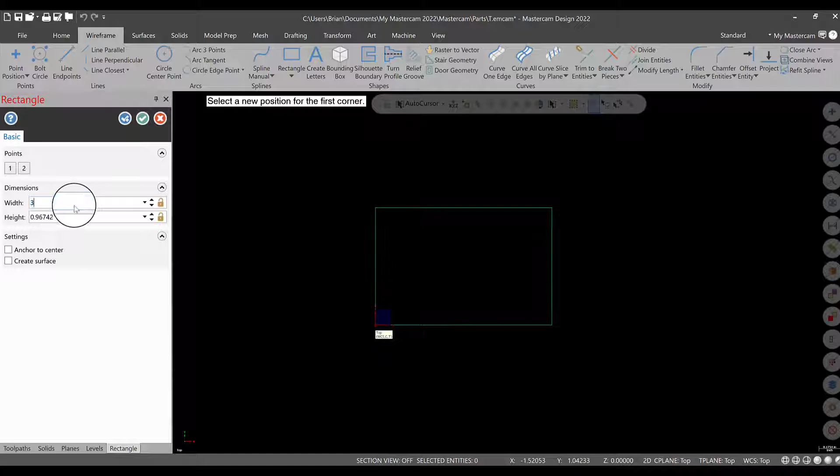I'm going to anchor a corner of the rectangle to the center of this gnomon and bring it out and click once, left click. I will then create the width at 3 inches and the height at 2 inches. Again, make sure this is set to 2D and hit green check. So now we have our rectangle. It's flat. If I go to front view, right click front, it's flat.

So let's check the size of this. One thing I do want to point out, here's some drafting. It is what it is. It just tells you the sizes. It's not like Smart Dimension or other softwares. It's 2 by 3. Okay, that's a good reference. Let's window these or click on them, hit delete with the keyboard. So now they're gone.

And let's go into levels now. What levels are is geometry organization. What's visible, what's not, how to select this, how to select that, and you'll see how this sort of flows. Right now we have 4 lines, 4 entities on level 1. I'm going to name this part wireframe. Okay? And now what I'm going to do is create a new level by hitting this plus sign. And I'm going to name this model.

Okay? Now, it is very important to know that if I right click and make sure this is active, it's the little green checkbox next to the number. When it's active, what you create is going to be on that level. Now, if you mess that up, there's ways to fix it, so don't panic. So now we have our rectangle.

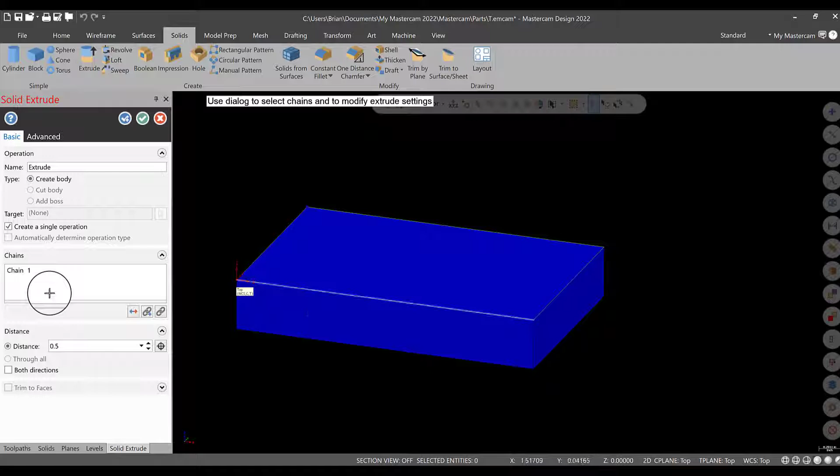We want to go to solids, go to extrude, select. This is the chaining dialog box, will be useful when we get to toolpaths, but just by default, it's going to chain it. Select the outside boundary, hit green check, and you'll see we're extruding. We're going to change the direction. We're going to create it as 1/2 inch. And that should be good there. I'm holding middle mouse button down and moving around. I will now hit green check.

And you'll see we have one piece of geometry, one entity on the model level. And we could turn it on or off, or turn our wireframe on or off. And that's the power of levels. It helps you stay real clean on what's going on. So now, what I want to do is change what level this solid is on.

Just to show you, if you click on a solid, right click, and go to Analyze Entity Properties, you can go down to this dialog box here, and let's say I want to create a new level, put it on level 3, and hit green check. Now that geometry is on level 3.

Let's say I didn't want to do that. Right click, Analyze Entity Properties, put it back on level 2, hit green check. Now we're back to the way we were. So you can fix it. Okay? So we'll pause there. I'll have you catch up, and we'll come back and start creating some holes.

Alright, so let's put some holes in this. First hole we're going to do is this 3/8-16 tapped hole here. So let's draw some wireframe geometry to locate this hole. So we could go back and make this level 1 active for part wireframe. That's fine. We could do a new level, whatever you want. Let's stick with this level here for now. Or we can change it.

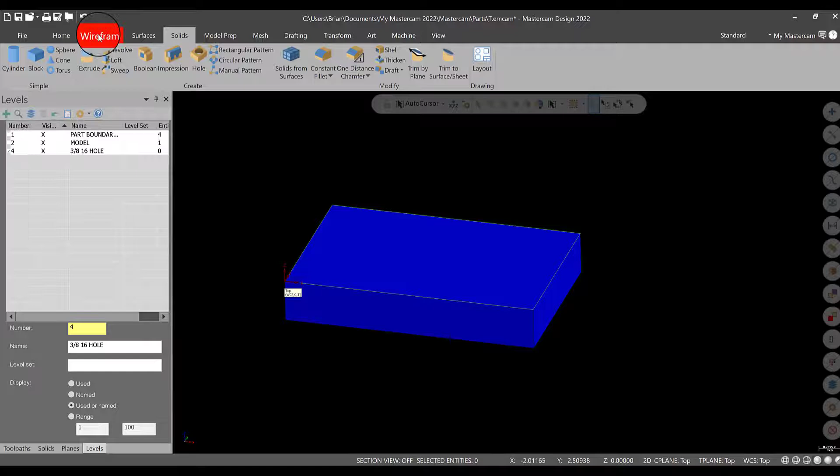So this is part wireframe. This could be part boundary. Okay. And then we could add a new level, and this could be 3/8-16 hole. So now this is active. Notice the check marks next to the number 4 level. And we need some wireframe geometry right now. Let's do it this way. Let's do a little bit of offsetting.

So we can offset these lines, okay, a distance of 0.938 and 0.531 to get an intersection. So what we need to do is go to the Offset tab in Wireframe, Offset Entity, type in 0.938, click this line, and then click the direction you want, then hit Apply, then 0.531, select this upper line and click down to pick a direction, then hit green check. So now those two lines are geometry, okay?

And if this line remains magenta colored, that means it was the last thing you changed. So right click and go to Clear Colors, which is the fourth icon on the right in the right click menu. So click that, everything turns to the wireframe color that was either defaulted or you selected. And now we have an intersection. Okay, so now we can go into solids, we can go to hole, and we can select the hole location.

So when we get into modeling, I usually skip a lot of the modeling in Mastercam because most of the time you're going to be importing models. So I do give a lot of the basics of models, how to do some of the stuff. But most of these skills later on you're going to work with are going to be editing. So I'm not worried about naming this or necessarily the target. It's going to default most of the time. What I am worried about now is the position of that hole.

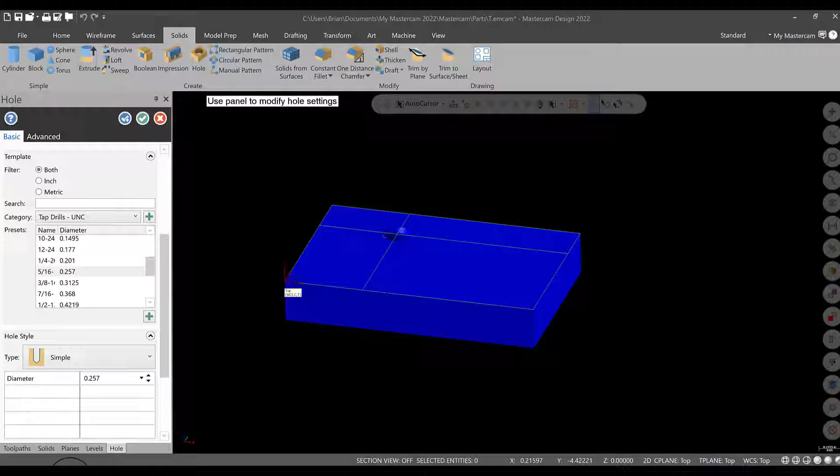And we have 5/16. So let's see what we have here. Or it's 3/8-16. Let me double check that. It is 3/8-16. My mistake. So let's get into here. It should be 3/8-16. That's correct. It does have the correct tap drill diameter for a class 2, which is 5/16. This is going to be through all, so the depth is sort of irrelevant.

Now there are options for a top chamfer. I'll look at the drawing, and there is no spec on that. So now again, it's going to default to 90. That is pretty typical to the machinist handbook. We're going to go with 82 degrees.

And we'll leave it at that at the 425. That's fine for this. I went with 82 only because we have a lot of 82 degree countersinks in the shop. We stock those. So that's the only reason I went with 82. That is not to the book. That is not standard. It will work in this example, but that's what we're going to do. So right now we'll hit green check, and we have our tap drill size hole.

So now what I want to do is get rid of the 3/8-16 hole wireframe spec. Now that's part of the model now. Okay, and we can even rename this 3/8-16 hole wireframe. And that's up to you how in detail you want to get. So we'll turn that off, and now we can start working again.

Let's do the next hole. So let's work with this one in the middle. So it's 1.5 and 1.125. 3/8 reamed hole, let's say. So let's do a new level, and this will be 0.375 center hole wireframe. All right, that is active. We can again go into wireframe and offset these lines to create an intersection in the center of this block, at least in the 3-inch direction. It's going to be 1.5 inches from this side and 1.125 inches from this side.

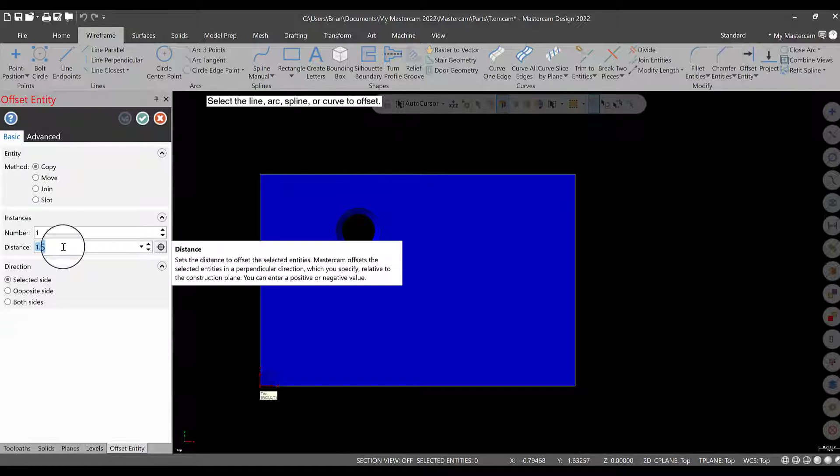So let's get back into Mastercam and we will offset those lines. So we'll go 1.1 inches from here to here. Or my mistake, let's get out of there. Actually, what we can do right now is before you hit apply, you can just change this to 1.5 and click out of the box and it'll automatically move. Then hit apply, so that one's set. Now we'll go 1.125. Click here and down and hit green check and clear colors. And now if I rotate this, we're ready to do our next hole.

Now, as I said before, we're not going to use the solids hole function for this. What we're going to do is we're going to go to wireframe, we're going to do circle, hover over the intersection here, create our circle at a diameter of 0.375, green check. So now we have our spec. Now, what we can do now is I want to go over some changes here. Let's say, for whatever reason, this is not the right diameter. Okay, go to the drawing and, oops, 3/8, we drew it wrong.

Let's say we click it, right click, and go to Analyze Entity Properties, and you can update the diameter here. Let's say we want to go to 0.5 inch. Okay, green check, it'll change. Right click, Analyze Entity Properties, 0.375, green check. You could also change the level in there like I showed you before. Alright, the other thing we can do is, I showed you how to use drafting earlier quickly. If we go to Home, or right click, Analyze Distance, and click from here to here, it gives us our distances quickly. It's more of a quick measuring tool in the software.

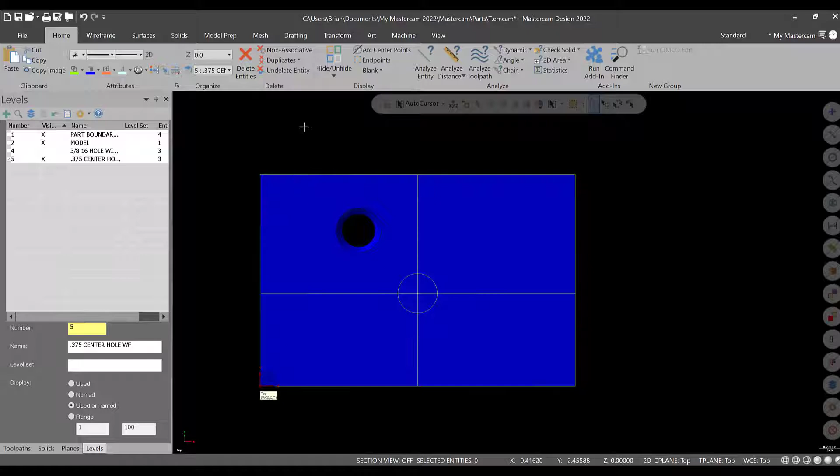So now what I want to do is I'm going to lose these lines because they're going to mess with my extruded cut. Then we'll get into solids, extrude, select the circle itself, so chain around, green check. Make sure you select cut body, very important. We're going to go through all. We will then hit green check. So now that 2D wireframe is there, our model has been updated. Alright, so I will pause here and we will continue with the rest of the holes on this workpiece.

Okay, so let's work on the lower left hole of this workpiece. Should be a countersunk hole. We are going to override this drawing. We're going to go to 82 degrees, primarily because I want to use one tool for when we get to machine this. So that would not be normal if you went and did this to print. We'll override that for this when we create this hole. So we're going to do this a little differently. We are not going to create geometry prior to locating the hole. So let's get back into Mastercam. And let's go to the hole function.

And this is a countersunk hole, 0.266 through hole. So let's get down here into a countersunk hole with a diameter of 0.266. Countersink diameter is 0.510. Countersink angle 82 degrees. 0.510, we're overriding the 100 degrees. 0.266 is the clearance hole. So all the specs are set there. This is through all. There is no top chamfer, so we'll omit that. Now the hole is set, but we need to get into the location.

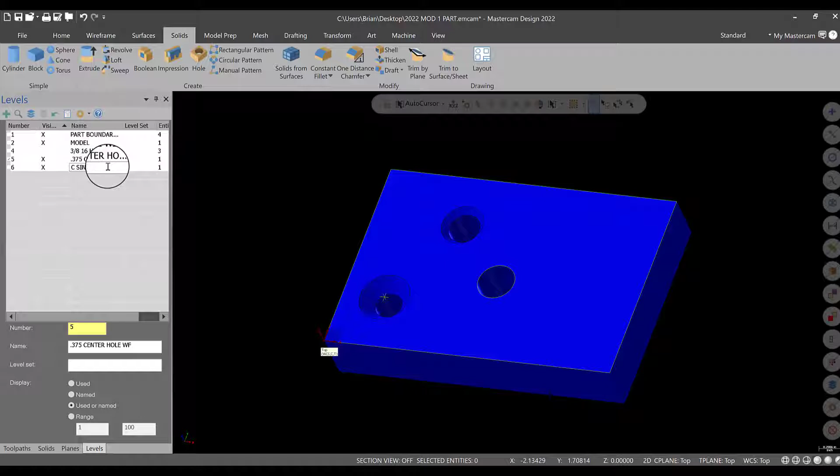If we right click on that, Analyze Entity Properties, okay, we have our location. It's on level 5. Maybe we don't want level 5, we'll go on level 6. And we have level 6, and this can be whatever you want to name it. Okay, and actually we'll just call it location wireframe. And again, these names are irrelevant. As long as they make sense to you, we're good to go. So there's that hole.

Okay. And now we can work on the next ones. So we'll take a look at our drawing here. And the drawing shows this counterbore hole. The counterbore hole, we are just going to extrude. We're not going to use the hole function in solids for this. And the reason for that is because I want to show you how to extrude to a depth. If we wanted to use the actual hole function, we would just do it the same way as a countersunk hole, except we would select a counterbore hole and give it those specifications.

So what I want to do is I'm just going to use the offset trim method, and we'll add a new level for this and just call it C-bore hole wireframe. Make sure it's active. Alright. We'll get into wireframe and we'll go to offset. And let's take a look at the drawing. It looks like we're ½ inch in the X minus and 781 in Y minus. So we'll take care of the ½ inch now. 0.5 this way. Apply. And 781 in the Y. So 0.781 from here. Alright, green check. Right click, clear colors. So now it's located.

Alright. Now we're ready to add some circles. We look at the specs of this hole. The through hole is 397, the counterbore is 719. So let's take care of the through hole first. So the through hole, 397. Select circle, select the intersection, create the arc, whatever size you want, type in a diameter of 0.397. Before you hit apply, just check it. You can change it later, but that's what we want to do. Then we'll hit green check. Now I'm going to lose my offset lines. It's called the offset trim method because you offset what you need and then trim what you don't need.

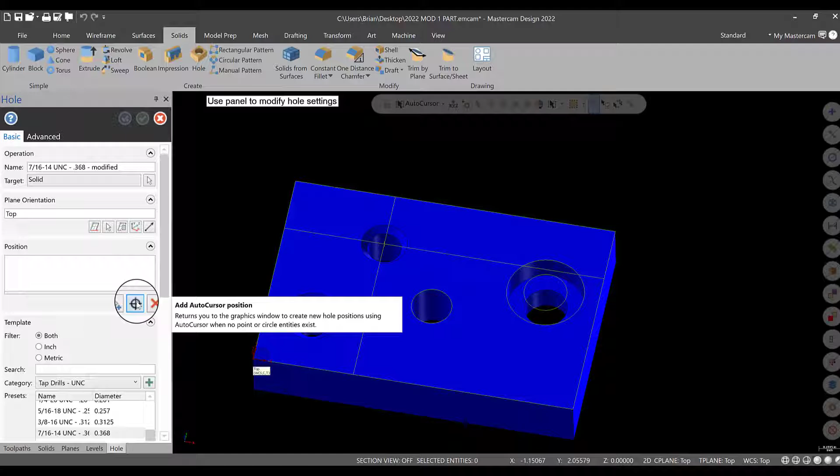We will then add our auto cursor position. Okay. And then we could work through this. So let's take care of this now. Let's just position this hole somewhere in space here. Right there. Okay. Then hit enter. And there's our hole, and we'll hit green check. We have no idea where it is.

Okay. So now let's edit this. Let's click this feature, right click, analyze entity properties, and let's locate it. So in the X, this feature is 3 inches minus 5/8. So 3.0 minus 0.625 equals 2 3/8. So go back here, and we will type in 2.375.

In the Y, 3/8. So we'll take care of that now. 0.375. We'll put this on level 7. Okay, hit green check. Now let's take a look at the solids menu, because this didn't update. Okay, just move the center point. Let's get into the solids menu, and you'll see that there's a big X here. And what's X'd out is our 7/16-14 UNC hole.

I'm not going to go into this manager much, but just for fixing things like this, if you click on this and go up and hit regen, it'll move to where it needs to be, because it regenerates the algorithm to position that hole. Okay, looks good there. All right, now we're all set with the solids. We'll go to toolpaths, leave it there. Everything looks good. We'll go back to levels, and we'll just turn everything off except for our model.

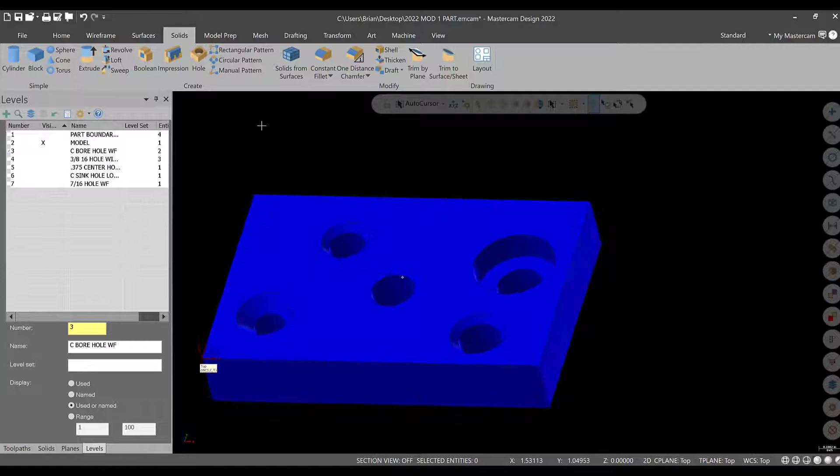I'll label this 7/16 hole wireframe, and there we are. So there's our model. Okay, now we'll pause right here and let you catch up, and then we'll come back and create our stock reference for this, and we can start machining it.

Okay, so let's start working with creating a new model for stock. Let's get in levels, and I'm going to add a new level, and this will be stock wireframe. Okay, and I'm just going to do a quick rectangle. I'm going to turn all this stuff off, except I can leave the model on. All right, and I'm going to do a new rectangle, and I'm just going to click that corner to that corner of the block. Okay, 3x2 instead of typing it in.

We'll hit green check. Okay, so now I'm going to turn the model off, and I'm going to extend these two sides over for 1/8 of an inch oversized material, so 1/16 a side. We're not going to worry about the Y. We're going to assume that's been machined or as is. We're just going to worry about having extra stock length here. So let's get into the offset area. We'll go 1/16 of an inch.

Click here, green check, right click, clear colors, and then let's connect these longer lines by going to modify length. Let's select a distance of, let's just say 1/4 of an inch, and the reason for that is I want to go back, hit green check, and use divide, which is sort of like trim, and trim the tails off and trim these inner lines so that you get one solid rectangle, right? And the corners do touch.

So we'll hit green check, and let's do a new level, and this will be stock model. All right, this is active. Go to solids, extrude, chain the outer boundary, green check, distance 1/2 inch. We're going to create body. We're going to make sure we go down. It goes that way. We're good there. We'll hit green check. And the only thing we need to do is right click on our stock model and make it a different color. Let's say red. Okay, so there's our model.

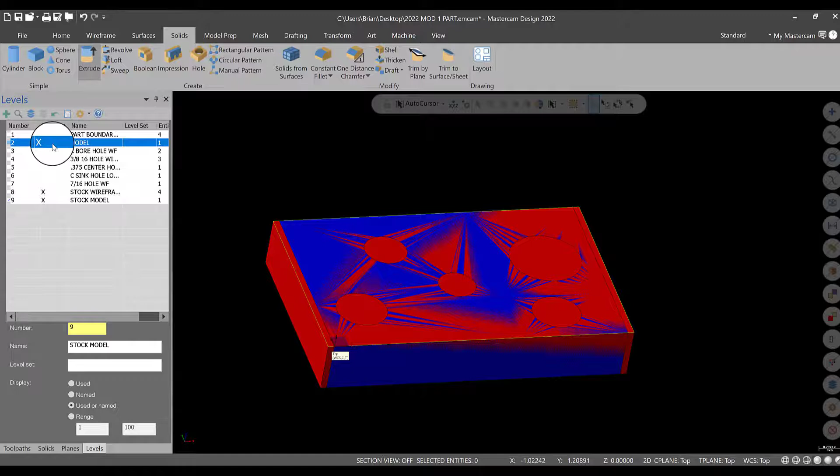There's our stock. And now we're ready to import our vise and modified soft jaws. So we'll come back, we'll modify the soft jaws next, we'll import them in, update the soft jaws, and then we'll merge all the files together, and then we can start getting into some toolpaths. So we'll pause here. This is the end of the part geometry creation, and then we can get into getting this thing set up to machine.

Okay, so this is the lecture folder in Module 1 on Blackboard, and what you see here is going to be the example 1 drawing, what we're working with. You're going to see the standard Kurt jaw.

You want to download this now. You also want to download the Kurt DX6 with no jaws. Download both of those now. Okay, this Haas Post content folder we'll work with in a minute. Then below here you'll see this video and this cutter compensation type video. Now, these two we're going to import or merge into Mastercam and work with. The Haas Post content folder we'll use when we get ready to machine. So first thing we need to do is modify these vise jaws.

Okay, so let's get back into Mastercam. I already have them downloaded, and there's a couple of ways to do this. You can modify the levels later. I'm going to turn the stock model, all the levels off, all the part levels off. Then I'm going to add a new level and call this jaws. Then I'm going to do another level and call it vise. Alright, so I'm going to make sure level 10 is active.

I'm going to go to File, Merge. I'm then going to select the standard Kurt jaw, hit open. Alright, and you'll see that you have options here. We can move it. Levels is what I want to focus on. We want to make sure that we go to the active level. Merges incoming part geometry to the current part's active level. Should be level 10. Click here, make sure active level's on.

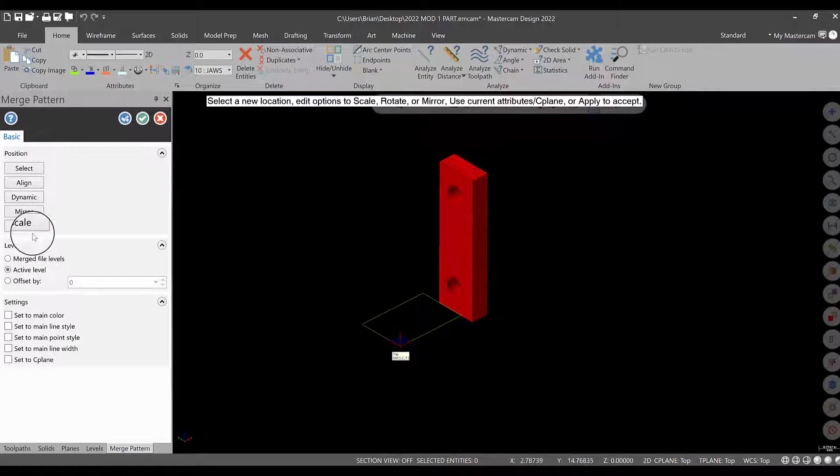Now, we can move this around. So if we go to dynamic, put the gnomon right there. Now we can spin it. But you'll notice we don't have a Z-axis. We need to come down here and select 3D. Now we can rotate this vise jaw 90 degrees this way. Hit enter twice. Pick the green, which is about the Y, and go negative 90 degrees. And that is good for now. So we'll hit green check. That looks good. Alright, and we'll start working with this.

Now, I am going to bring in the vise while we're at it. I'll put the jaws in the vise, and we will process right through this, machine the jaws and go that route. So now I want to go again to File Merge, but first make sure Vise is selected as the active level. File, Merge, select the Kurt vise, hit Open. You'll see it imports in. Now, we're going to go to active level. And then we're going to hit green check, because I want to turn the jaws off.

Also, our level came in with it. It has no entities on it. See right here is a 0. So what I do is right click, Clear empty levels, All. Let's make sure that's gone. So now we have the vise and the jaw and the part. But right now the vise is sort of in the way.

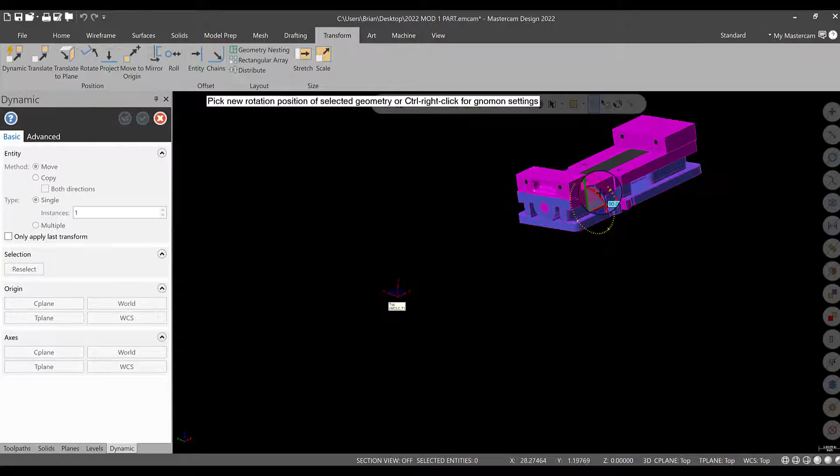So what I want to do is go to Transform Dynamic. Select everything. Hit Enter. I'm going to end up selecting just the center here. I'm going to shift this thing over. Then I'm going to rotate it how I want it. So it's going to be 90. And then I'm going to kick it this way. It's going to be negative 90. And that'll work. So I'm going to hit green check. Now I want to right click, clear colors.

And that's pretty good. What I want to do now is there is the actual model of the guard for the vise. I'm going to get rid of that. Also I don't need to worry about the threaded rod or the actual carriage portion, the part that moves the movable jaw on this vise. We'll try to keep it as simple as possible. So now I want to position my soft jaws. I'm going to turn the jaws level back on.

I'm going to move it. So I'm going to go to Dynamic. I'm going to select the soft jaw and end selection. I'm going to put the gnomon on the back side of this hole, and then click this little center sphere to give me full access and movement of the jaw. Then bring it over to the vise and select the actual threaded hole in the vise and click it so it merges. Everything looks good. There's not a gap underneath here, so these jaws are not symmetrical. This hole is offset. That looks good. So let's hit green check.

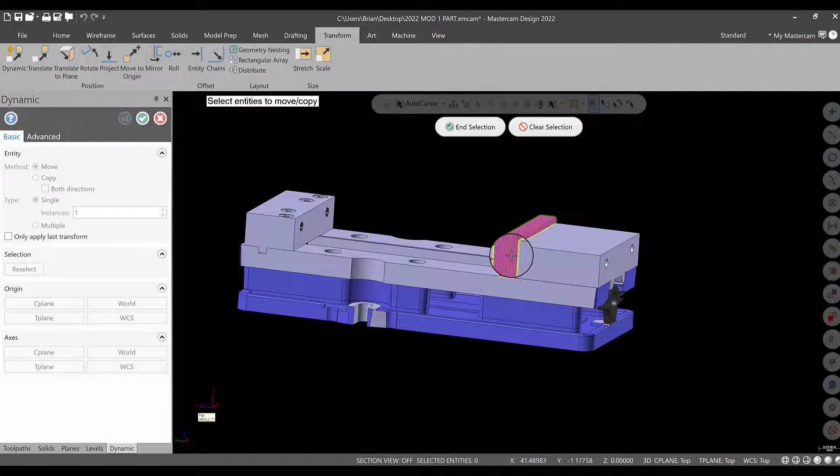So now let's copy this jaw. Let's go to Dynamic again. Let's select the jaw. Let's hit End Selection. Let's just put the gnomon at some center portion here. Go to Copy. And I'm going to drag it over.

Alright. And I'm going to spin it now, so about the Z or the blue. So it's going to be 180. Then I'm going to hit Apply. Now, when you hit apply, you're back into the window. So I'm just going to reselect the jaw and hit end selection.

Put the gnomon on one of the clearance holes for the bolts. Select the center sphere. Don't worry about it, it's still on copy. We'll fix that in a minute. We'll snap it to that circle. Select move. Okay, that looks pretty good. Alright, I'm going to hit apply.

Now what I want to do is bring these jaws together. So I'm going to select the jaw itself and the movable vise, the back part of the vise. Okay. So now I want to hit end selection. I'm just going to select the midpoint here. Then I'm going to select the y-axis only and bring it together. Okay. Then I'm going to hit green check.

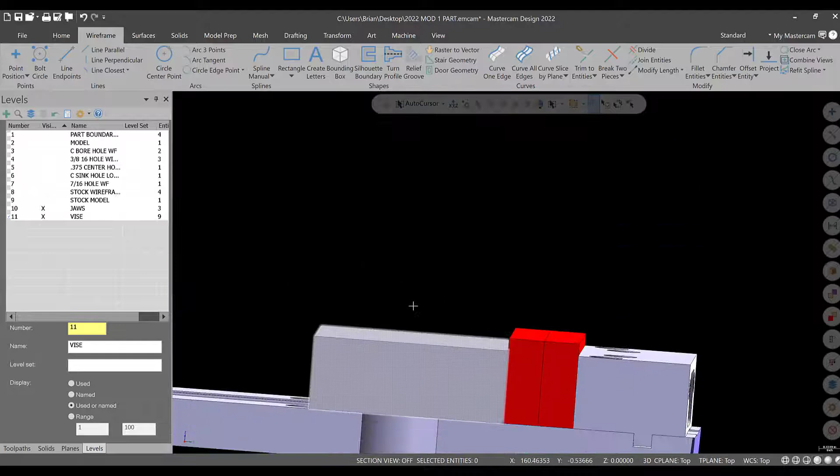Now I want to right-click clear colors, and I want to make sure everything looks good. I want to make sure that they're all in line. Everything looks good. I don't see any issues. So you know, I'm using a space mouse, so my movements are going to be a little different than what you can achieve. Okay, so it looks good. All right, we're in good shape.

Okay, so now what we need to do is we need to machine these for the part, and the part is back over here. Okay, so we need to draw some geometry. So I'm going to leave the vise on, but make sure the active level are the jaws. I'm going to draw a line, and I'm going to snap it to the center of these. So if you hover over the midpoint, it'll kind of snap. Draw a line straight over. Then hit green check. I'm going to go to top view now.

So then I want to have the step in this jaw be a little bit under the width of the part. So I'm going to offset this, and let's say I want the total width to be, if it's 3 inches, it'll be 3 and 7/16. So instead of actually getting a calculator out, you can go 3.4375 divided by 2, enter, and it gives you the number. So you can do the math in some of these columns.

Click over, green check, right click, clear colors, and then right click again and go to analyze distance and select these lines to make sure you got 3.4375. Now I did my math wrong. It should be 2.4375. So let's just do that again. Alright, offset. I'm going to go 2.4375 divided by 2 and click both directions. Green check, clear colors, right click, analyze distance, here to here. Okay, 2.4375. Good. All right, we'll hit green check.

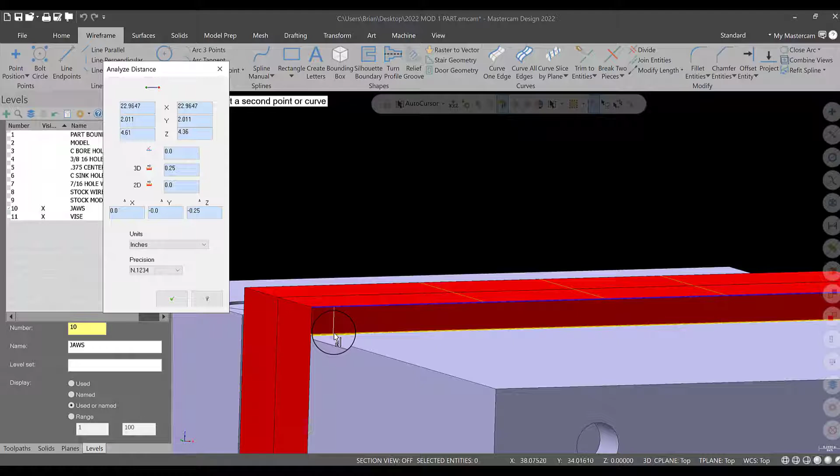So now we need to machine this material away. Probably we don't want to go all the way down to the jaws. What we can do is we can look at this. If we right click and go to analyze distance, here to there, it's 1/4 of an inch. So what we need to do is we'll probably go down 200 thousandths.

All right. So let's get ready to actually do some tool paths. The first thing we need is a 0. We need a point on this vise jaw that we're going to edge find and set our work offset to. And we're just going to go to this top left corner for this part. So we're going to start messing with the planes manager now. The planes manager are the 0s, not only for Mastercam geometry creation and all that. It is where your work offset is, linking the Mastercam program to your machine tool.

So we want to do a new plane. So we're going to go with the pull down. We're going to go dynamic. Okay. We have a gnomon attached. We're going to click right there on this corner.

Okay, pretty simple. And then down here, make sure set as work coordinate system, T-plane and C-plane are on. The work coordinate system or world coordinate system is the overall 0 on your workpiece. But for now, it is very important that your WCS matches your T-plane and your C-plane. Very important, because the only time these really change, arguably with C-plane, is when you want to do construction. I find that sort of obsolete, but you can work with it.

The thing here is, if you want rotary axis moves or Mastercam to kick out A or B or C axis moves, it is the difference between a WCS and a T-plane. So it's very important for our 3-axis work that these are all the same. Okay, let's hit green check. So there's our new plane. Now we could rename this. It's probably not a bad idea, and we'll just call it fixture.

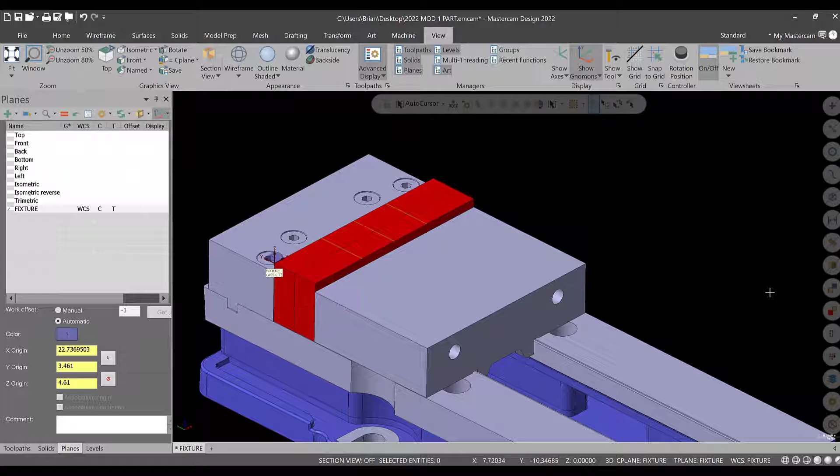Okay, so what we're going to do now, right prior to machining, I was debating whether or not I wanted to step these jaws or not. You could use parallels in here, but we're going to step them. So what I want to do right now is move this vise jaw back 2 inches. The only reason I'm picking 2 inches is because we use a 1-2-3 block, flat, and then clamp on it. It's very important that you clamp on the vise or have the vise being squeezed when you machine it. Otherwise, this jaw is just loose in space and bad things can happen.

So let's get into dynamic. Let's select both portions of the jaw, hit end selection. We're going to select the middle. We'll select the y-axis. Then we'll type in minus 2.0. Enter, enter. So now they're spaced 2 inches apart. Let's check that. Right click, analyze distance. Bottom of this jaw to here, 2 inches. We're good. Now, our lines don't work out anymore.

That's okay, because we can go to wireframe, modify length, type in a distance of 2.0, and click these lines. So now they're extended. Now, we are going to cut a little bit of air if we do it this way, if we have the cutter come in and machine that, but that's not the end of the world. We can be more efficient and just do each jaw separately, but let's just leave it like that for now. So we'll hit green check.

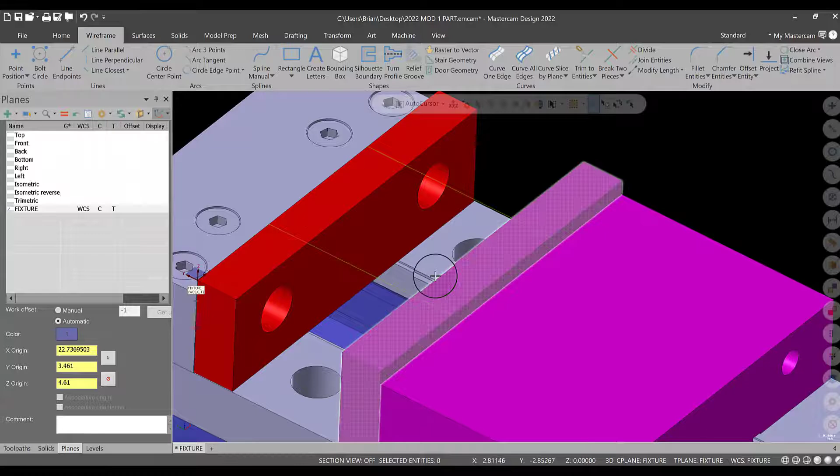Now, let's offset a line in on each one of these jaws. What that'll do is give us a nice guide curve for our chain. So let's hit offset. Let's hit a distance of 0.2, which is fine. You can go 1/8 of an inch. 0.2 is fine, that's what was on here. We'll select this line, go over. This line, go over. Then hit green check. So now we have, right click, clear colors, our lines.

Now let's use the divide tool and clean this up. I'm going to lose these outer lines because that material is going to be gone. We don't need that. The other thing we can do is lose the centers here. Like I said before, that's debatable. Right then we're going to leave them, but let's lose them right now. So now that's essentially what we're going to be working with.

So now we're ready to actually extrude this down and get this part into a 3D state. So now get out of here, and we need to get some geometry on these jaws. We can't really reference these edges right now. So in wireframe, we'll go to Curve One Edge, and then select these outer lines.

Okay, and it just creates wireframe geometry on that intersection. So hit green check. Then we've got to go to divide again and get rid of the geometry in between this area. That better references what we want to extrude down in this cut. So now we're ready to extrude this.

So let's go to solids. Let's do this one at a time. Hit extrude. Select this chain. There's the chain. Hit green check. And then we want to have a distance of 0.2. I'm going to leave a little bit away from the jaw so we won't hit that. That'll work out fine. It could be less. It's up to you, but I think that'll work fine. That's what we're looking for. Okay. So we'll hit green check.

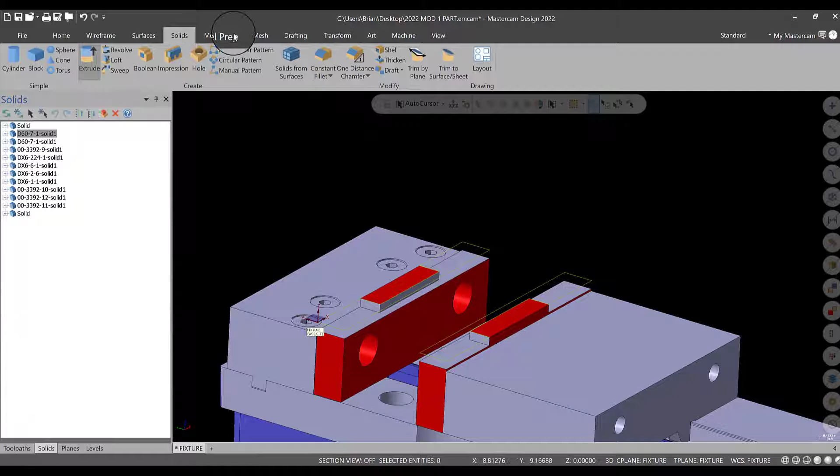So in Solid Manager, I want to really delete. You'll see these are our solid jaws. This is the history. You can go back and edit these if you want. But to be honest, I don't find that totally helpful sometimes. I think it's sometimes better to go into model prep and modify things if possible.

So for right now, just to keep this simple, what I want to do is select all solids, right click and go to remove solid history. Now these solids are just solid bodies. Okay, we removed the association between the 2D and the 3D. So now if we click this line and hit delete, nothing happens.

If you try to delete a line and you do not remove the solid history, you'll get an associated geometry error. So it'll ask you, do you want to delete this? And it gets kind of weird. So you're better off by far to just remove solid history, especially on simple parts like this, because you can always go back in and modify later. It's not the end of the world.

So what I want to do now is get into levels. I'm going to turn the vise off. That helps so I can see better. Then I'm going to get into here, and I'm just going to delete this 2D geometry. We don't need it right now. We'll work with it as is. Okay, so I'm just hitting delete on the keyboard. So there we are. Turn the vise back on, and we are good to go.

Now, one issue we have is we do need something to reference our stock for these vise jaws. Okay, so this is the results of what we want. You don't really need it. It's up to you. It's how realistic you want to get. We could actually import the jaws again and put them in place and work with it that way.

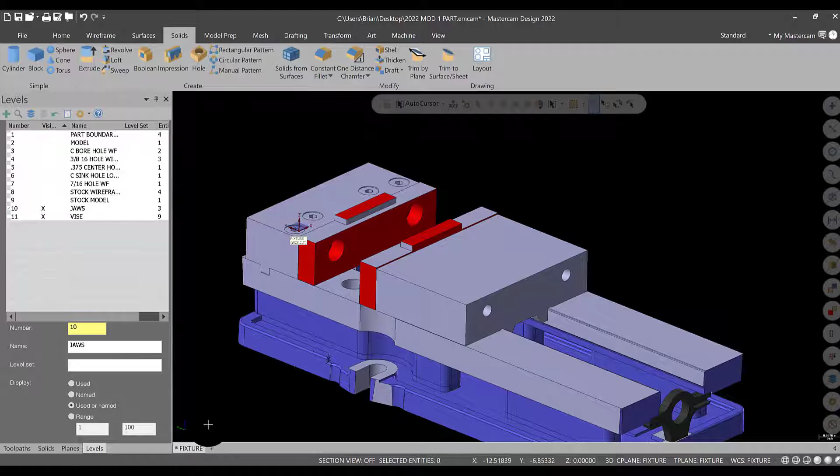We have our fixture view sheet all set. So that's important. Double click on it, you see it goes back to where we're at. This is what we're going to be looking at. We're going to assume that there is a 1-2-3 block in here, remember that. And then we can actually machine these jaws.

So first thing we need to do is get into the lecture, and then make sure you download the Haas post content folder. So I'm going to click that now. Mine is going to download right into my downloads. And then I'm going to get back into Mastercam, and I already have that file open. But what you want to do is take that folder.

All right. I'm going to minimize this screen, and I'm going to minimize Blackboard. And I'm going to right-click and go into the File Explorer. Go to Downloads. You're going to want to take this generic Haas 3-axis content folder that you just downloaded, click it, hold it, and drag it into the window here. Okay? I already have it in there, so I'm just going to X out of here.

And X out of all of this. This will not happen to you. Okay? So we're good to go. That's what you need to do.

Now what happens is when you go to Machine, Mill, you're not going to have this right away. You have to go to Manage List. Okay? In here, you're going to select the generic Haas 3-axis mill, hit Add, so it goes into the machine definition menu items, hit green check, and then when you go into the pull down, it'll be available here. So make sure you do that. Click right here, and now we have a machine group.

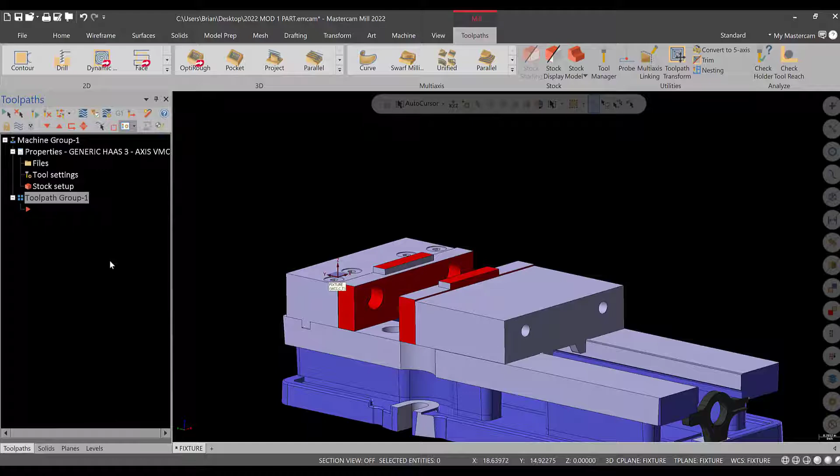Okay? The machine group is really not changed a lot if you're going from lathe to mill to wire to whatever. So for right now, a machine group has the files, tool settings, and stock setup right here. A toolpath group, you can have multiple toolpath groups in a program. You can have toolpath groups on top of toolpath groups on top of toolpath groups. They're just there for organization. Okay, and I'll show you how to organize that. All right.

There are a couple different ways to define stock in Mastercam. We're going to use the stock setup for this first one. So what I'm going to do is I'm going to click anywhere in here. I'm just going to click Files, and you'll see that when you click that, you got Files, Tool Settings, Stock Setup. You have the same thing here. All right. Not much to do in Files. We'll leave that for now.

We will go to Tool Settings, and you could define a program number here. Feed calculation, I'm going to go from material, and these are just going to be aluminum. That's fine. We'll get into speeds and feeds when it's appropriate, and work with it from there. I do have libraries we could work with, but we'll end up just typing them in for this one just to keep it as simple as possible in that respect.

We are going to want to assign tool numbers sequentially. That means it's 1, 2, 3, 4, 5. That's how we're going to operate. We're going to warn of duplicate tool numbers, all right, and that should be enough. All right. One thing I want to do here: let's just double check aluminum, what the settings are.

So if we click aluminum, the base cutting speed is 1,000, and the basic feed per tooth is 7. That's okay. We are going to have to be careful when it comes to high-speed steel. We might have to reduce the surface footage, probably around 200 if it's aluminum. Some of these might have to be reduced, but these are pretty generic. Okay, so that's okay. Even the 7,000. We can tweak this, okay? It depends on the rigidity of your setup, but this is a good overall base surface footage and base feed per tooth. Okay, so we'll hit green check, and that's fine.

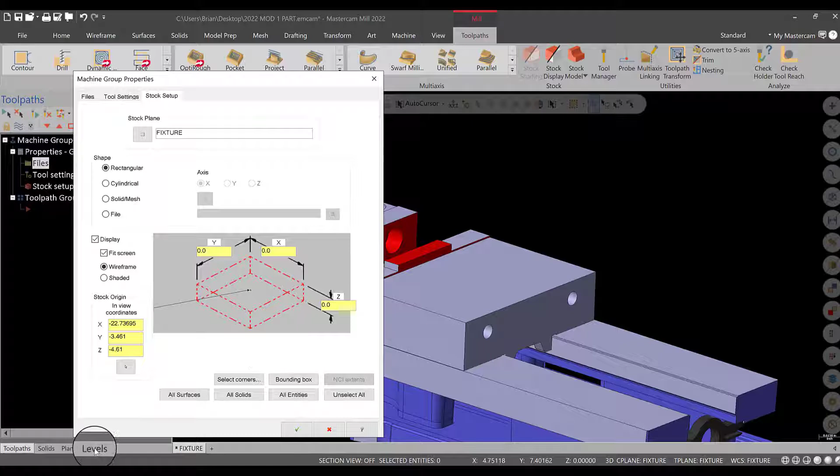So let's get into levels, and it won't let you because this is open. So let's just hit green check for now. Get into levels and turn the vise off. So all we have are these jaws. It's the only thing on. Back into toolpath, stock setup.

Now what I want to do is I'm going to select all solids. So here is the outside spec on our stock. Let's hit green check, and you should see a box come up that's dotted. That represents our stock. Like I said before, it's not 100% accurate to the true stock. We do have a lot of hollow space in here.

But the toolpaths we're going to be using are very simple. We're just going to use contour for this. So it's going to cut a lot of air anyway without a lot of extra chaining. And I don't want to get into the more advanced toolpaths yet. So we're going to just use this for stock, and it gets into what stock setup is before we get into the different types of ways to define stock. So that's a good base example. So that's what we're looking at.

Get into planes, levels, and turn our vise back on. So we're ready to roll here. All right, go back to toolpaths. Now I'm going to minimize the properties, and we're going to work with toolpath groups. So this first toolpath group, if I click on here, left click, and hover over it, it'll turn into a text box. So I'm just going to call this fixture. All right.

Now, the organization of this tree is critical. So I want to have another toolpath group that's going to be part. So what I want to do is go to machine group. Very important. These leader lines and where they go to is very important. If I right click and do new toolpath group here, it'll be associated with this leader line here. We don't want that. We want to have separate access to it. So we go to machine group, it'll be associated and have another tree root here.

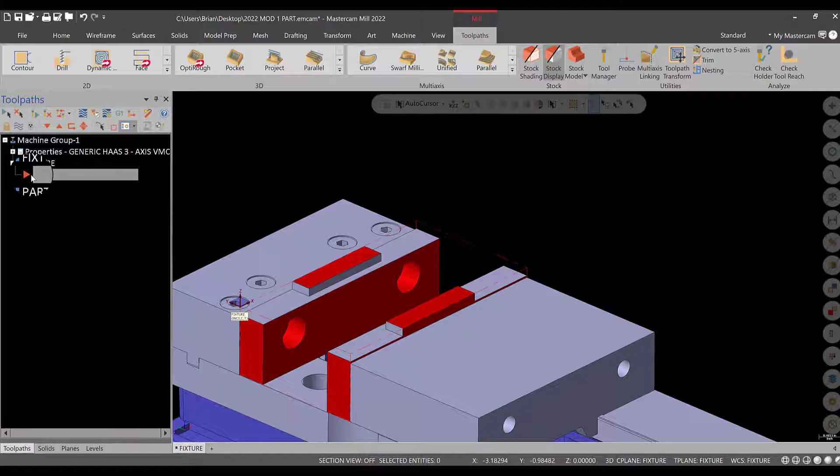So if I go right click, groups, new toolpath group, you see the leader line change. So this is going to be part. Now that's fine for now. I just want to go over that. You'll see that fixture has nothing there. What I want to do is this little red cursor, hit the up button, and now we're ready to roll. The only reason that didn't have a plus next to it is because there's nothing to add. There's no toolpaths yet. So we are ready to actually start defining cutting operations. So I'll pause there, and we will continue with our first contour toolpath.

Okay, so let's get some wireframe geometry on here that we can work with. Now I know we deleted some things earlier, but that's fine. I'm just trying to have a little bit of redundancy in this to have you working with different tools and to see it again. So we're going to go to wireframe, go to line, and I'm just going to select a line here and select a line here. I'm also going to select a line here, and just to change it up we can also go to curve on one edge and select this line. So there's a couple different ways to do that.

I'm going to levels and make sure that the jaws we're on were good there. So this is going to be our geometry we need to machine this. We're just going to do 2D geometry, no 3D geometry for actually machining right now. It's not 100% necessary yet. We could have, but not right now. So now we can go to toolpaths, which now pops up after you have a machine group.

And we're going to go to contour. We're going to select this chain and this chain, making sure the direction makes sense for climb cutting. Then we'll hit green check. Now we can go a contour toolpath type, 2 chains, makes sense. All right, we can go to tool, and let's go to select library tool. And what we're going to select is a half-inch carbide cutter.

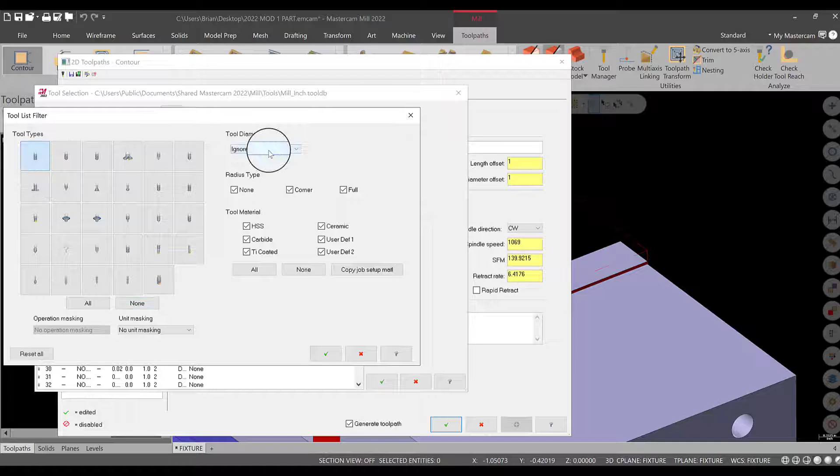Well, the filter's on. What the filter does is organizes the entire library into what you need. So we go to the filter, and this is how we select what we want to filter the list, what we want to see. So we want to see none. Select only flat end mills equal to a 1/2 inch diameter, then hit green check. There's our 1/2 inch cutter, hit green check. Notice that it's tool 1.

Okay? Our speeds and feeds are on the slow side. They are. Okay? But I would much prefer that you run it at this surface footage and this chip load than break the cutter. So for now, we will do rapid retract. This is fine for us. Again, if you go into a speed and feed calculator, or even if you double click into here, you get to finalize your properties.

You can see the tool specific surface footage. This is a high-speed steel tool. If we go to carbide, if I remember correctly, it should be about the same. If we right click and reinitialize speeds and feeds, it's the same 100%. So if we right click and get into this feed and speed calculator, we could tweak these values. Okay, but for now, this is fine for us.

The most important thing is number of flutes. Make sure that's right. And again, all that stuff is in this window. Right click, and it's going to be in the feed and speed calculator or reinitialize speeds and feeds. Okay, but again, as you work with this, we'll get more into that. The generic settings are fine for now for 6061 aluminum. That's ideal for us. It's pretty conservative.

Okay, the holder. I'm not worried about the holder information right now. The only thing we'd have to worry about maybe is projection, but it'd be very unlikely to shank out on this workpiece, so I'm really not worried about it. You could edit the projection, but for now, I'm not gonna worry about that.

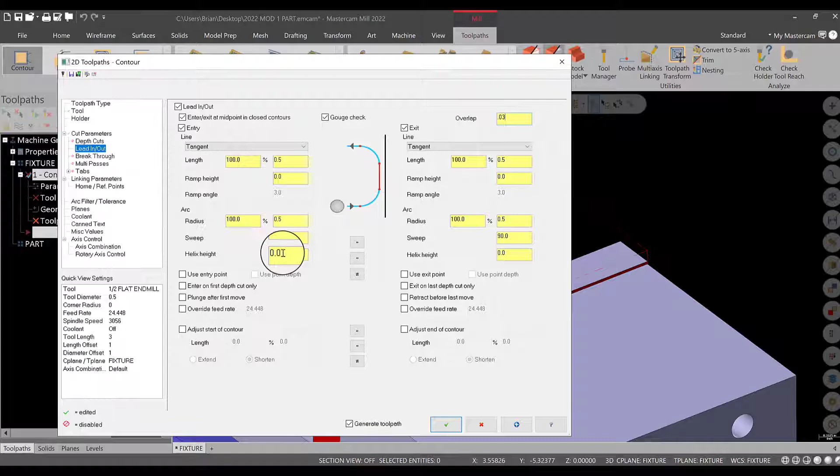So you want to overlap a little bit, usually no matter what you're doing. Otherwise, you can get little ears and things like that. So everything here is going to be fine. I'm not going to have you change as much. We will get into this later, but we'll leave default for now. Breakthrough amounts we're not going to need. Multi-passes we're going to need. So what multi-passes does is it offsets the toolpath over and over again. We're going to leave it off for now just to see what happens. Okay? We don't need tabs.

Linking parameters. Now, we want to turn clearance plane on at 2 inches, only at the start and end of operation. We're going to use absolute on all of these for now. Important. You'll see when I change that, it went to a depth of -0.2 because that's where the geometry is. We do want to change top of stock. That's going to be 0. That makes sense because it's absolute to this 0, 0, because that's what's currently on.

Okay? So if you ever have questions on these, we will go to incremental and associative as needed. Just hit the help menu, and it is very helpful. So if we get into here, absolute incremental values, read this. Very helpful. Okay? If you're lost. Let's get back into here. We're good to go. This is all set. Again, all that goes over is the top of stock and depth right here. Okay, always from 0, 0 absolute.

Incremental values are relative to other parameters or chain geometry. Depth and top of stock are different from clearance, retract, and feed plane on purpose, and you'll see that in the next module when it comes to drilling. Depth and top of stock are relative to the location of the chain geometry. Our chain geometry is down at that point, -0.2. That's why when you go incremental, it goes to 0. Absolute is -0.2. Makes sense.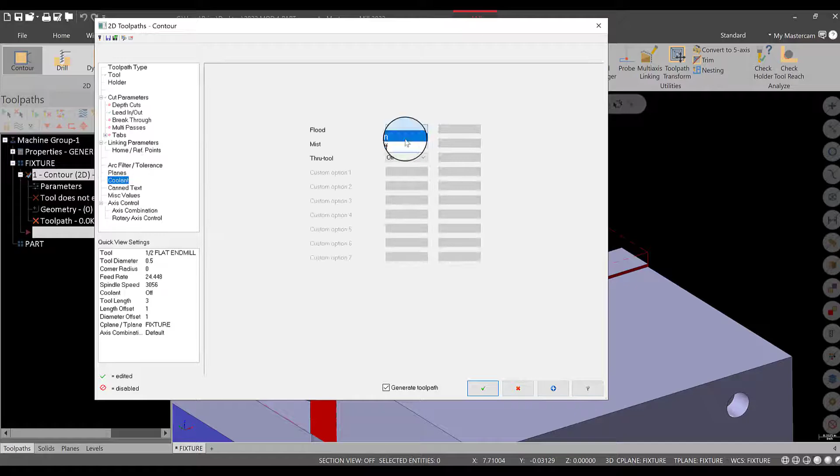Okay? Now we can hit green check, and we will see our tool paths. Okay? The yellow are the retracts. You'll see it retracts over, and then you'll see these real tall retracts. That is the going 2 inches to clearance plane only at the beginning and end of operation. The green is the lead in, the red is the lead out.

Right? And you'll see that right now this is not really what we want because all this stock would still be here. Okay? If we go to backplot, which is right here, and then hit the play button, you'll see what this is doing. Okay? Again, it's sort of what we want, but it's not exactly because we're leaving all the stock to the left and or right of the cutter. Okay? Let's get out of here and let's go use multipass.

So when we get in here, we're going to go to multipasses, turn it on, and the spacing, this is a 1/2 inch cutter. So I want to do a 1/4 inch spacing, taking half the cutter each time. I'm going to have nothing for finishing. I'm not worried about that. I'm going to finish pass only at final depth. There is no depth of cut, so it's sort of irrelevant. I am going to go to keep tool down, and then we're all set here.

The only thing I need to change is going to be the number of passes. Let's just change it to 5 for now. Let's hit green check, okay? And you'll see that that is actually too much. So if we regenerate this, now it automatically regenerated, but hit regenerate, okay? And that redoes the algorithm of the parameters you just put in. So if this is for whatever reason X'd out, just regenerate.

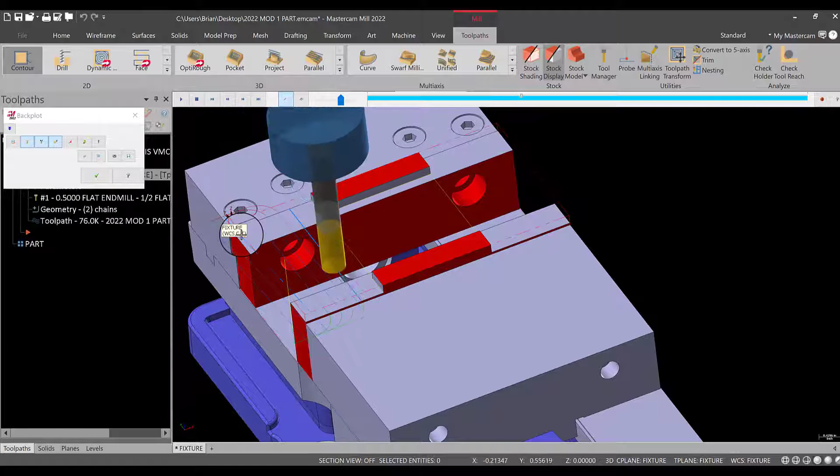Okay, there we go. We're good, except for it's actually not cutting enough. These lines were an illusion. These are the retract lines. If we go to parameters and turn keep tool down off, green check, you'll see that they turn into retracts. Okay, the blue lines are cutting. That is actually not cutting enough.

So let's go back into parameters. Let's change this to 7. Hit green check and regenerate. That is just about right because this represents the center of the cutter. Okay, so what I want to do is hit backplot, slow backplot down using this little slider bar here and hit play.

That's about right. Okay, now if you want to see what happens without having to play with the slider, you can hit S on the keyboard and it goes through. I'm hitting S, or you can hit B for back and it goes backwards. Just so you know, so S for forwards, B for backwards. So this looks good. We'll run it in backplot. Alright. So there is our multi-passes. So we're good there. Okay.

Now I don't want to see these toolpaths anymore. Okay, I want to focus in here. You can hit these 3 squiggly lines when this is checkboxed, and it'll turn them on and off to help you just see what's happening. Now I want to do a contour and take care of just one pass to get rid of these edges. So what I'm going to do is go to contour. I'm going to select that chain.

I gotta be careful because that's going to be conventional cutting. So let's change direction here to make sure the cutter is climb cutting. Then we'll select this one, climb cutting. Okay, hit green check. Go to tool, we'll select tool 1 again. Speeds and feeds are going to be defined because they're saved from the last operation. We'll go to cut parameters.

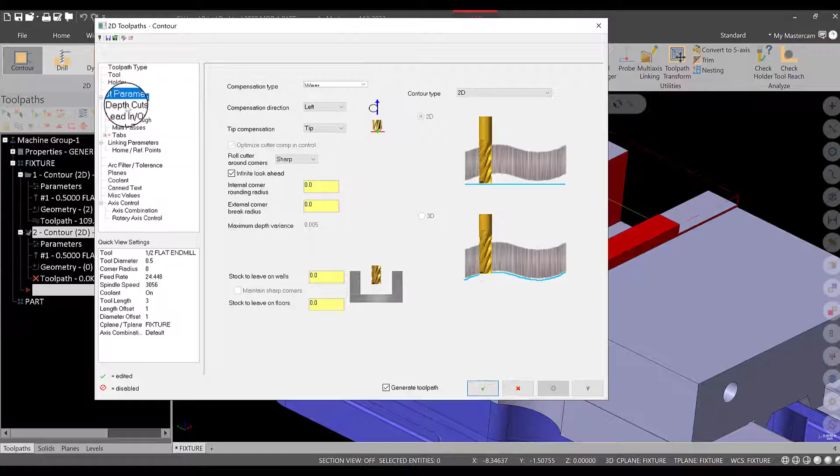Okay, it looks pretty good. We'll watch it in backplot. Hit play. And you'll see it comes in and it's climb cutting. Cutter's going clockwise. Come up and go over. Okay.

So those 2 are done. Now, let's talk about a couple other things here. We can label these. So there's 2 ways to do this. You can go to parameters, and you can go to the tool here and type in, this is going to be rough sides of jaws. Okay? That'll type in as a comment. That'll show up in your program.

You could also click here and hover, just like you would to create a new toolpath group, or to rename a toolpath group. And this can be step in jaw. And they will go in your program, and I'll show you that in a minute. So right now we're all labeled, we're good to go. One thing on that, instead of hovering over this, you could always right click and you could rename it. So you could edit, go to groups, and it's going to be renamed. So I'm not worried about that for now.

So we're good there. Let's select fixture. So when you select fixture, it selects every toolpath in there. That's why it's important that you don't put the other toolpath groups that are separate work offsets or separate in any way underneath this operation. This grade leader line is critical. Where they go, very important. So these two are selected.

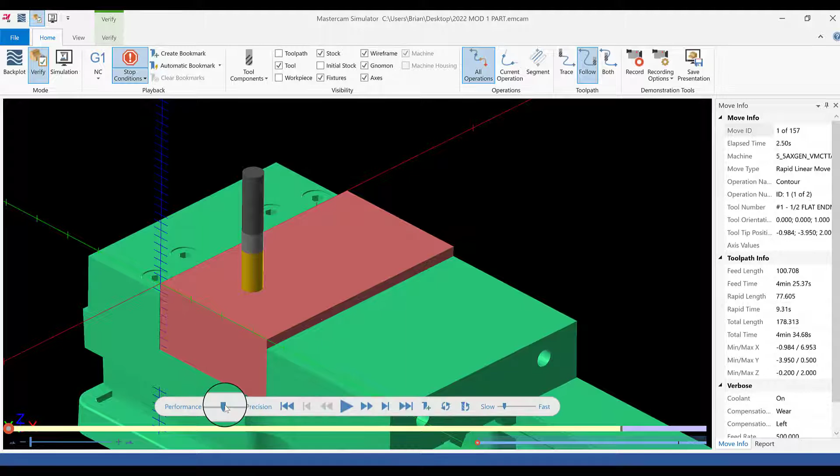So now we'll slow it down, turn a couple settings on. We'll do op change, that's fine. In verify, we'll make sure color loop is on. And other than that, I'm going to put the precision and performance slider bar in the middle. That is just how accurate this is graphically. So let's hit play, and you'll see it cut. And this takes 4 minutes. Again, it's not the most efficient toolpath,

but you see it does plunge, and it looks like it's leaving material, but it's not, because that is not there. And that is the issue with not being accurate with your stock. It is not critical for this operation. To be honest with you, in the shop, I wouldn't even verify this. I wouldn't even go to this screen, because this is so simple that backplot is actually ideal.

When you go to backplot, now, let's say you want to see both of these in the toolpath lines. Both of these are highlighted. Okay, hit green check. If you want one of them off, just go in here, select them separately, and that little green checkbox is really what tells you what's on and what's off. Select both. They're both on. Hit backplot. You can watch it run. Now, if you want to see a representation of what the end mill is doing, hit this little quick verify on, or simple verify, and it shows you what's going on. All right? And that's ideal.

So we're good there. So our jaws are done. So we can hit save. Very important to save off, and I haven't saved this yet in a while, so let's hit save. Okay. And now we're ready to look at the code for this, because these jaws are ready to be machined. So we're ready to go to the machine, essentially.

We double click on fixture, that's where we're at. It's fixture offset. We'd have to edge find that corner of the jaw. Okay, touch off the top of the jaws. We're good there. So we want to post this code. Hit G1, hit green check. I am not worried about the name right now. Just leave it, and NC file is fine. So hit save. Where you save it does become critical.

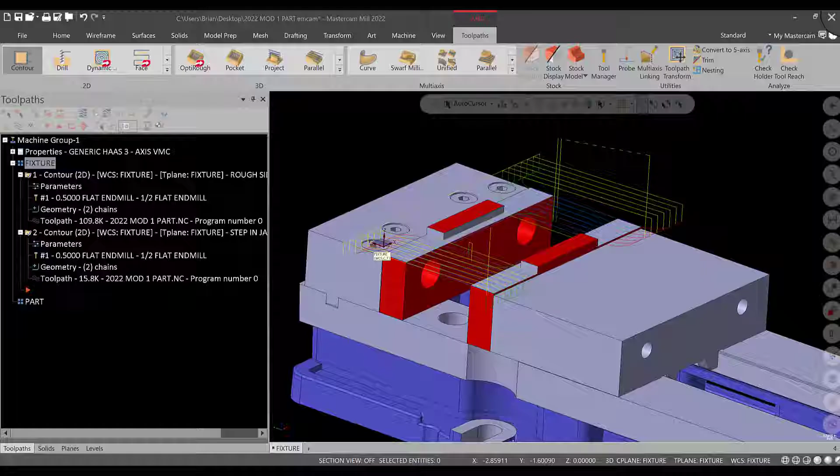And then you're going to want to file, save as. I always save it as a text file. It's irrelevant. And again, save it as something very simple. It's easier to upload. And then bring it into the machine tool. So after you get to this point, you're ready to bring it to the machine. So that's really it. I X'd out of there. That's it for these soft jaws. So I'll pause there, let you catch up, and then we'll get into the actual part machining.

All right. Okay, so let's click fixture here, turn our tool paths off so we can see what's going on. And now we're going to have to position this jaw a little differently. So what we need to do is protect the 2D wireframe geometry that we have. So to do that, let's put it in levels. Let's just do a new level, and this will be fixture cut wireframe. Okay, something like that.

Then what I want to do is select these lines. I want to right click, and I'm going to go to Analyze Entity Properties. I'm going to put them on level 12. Now I have multiple lines selected, so you have to get this Propagate button here, and hit green check. And you'll see we have 4 entities there. That's good for now, just in case we got to go back and change it later.

Again, we might have to move some of these around, but we're going to assume that they've already been cut. It's unlikely we'll have to go back, and it's not a big deal if we do. You could have double setups, one to do the jaws, one vise already done with the part in it. I don't know if that's really worth it. Not for this setup. Okay, so let's turn that off.

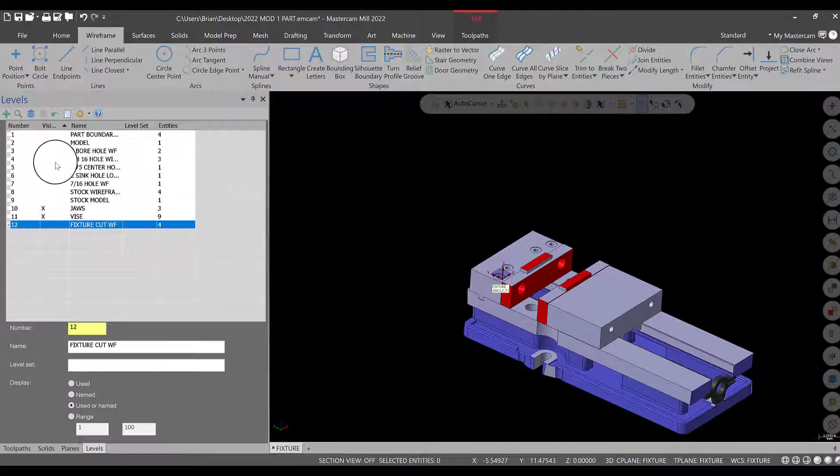And what I want to do now is turn our model and stock model on for now. This is what we're going to move. So we're going to move that to there. But we really need to turn everything on, because if you only move the model, the geometry won't go with it. Now, do we need this geometry? Not really. We could delete it. We did delete solid history earlier, so it is sort of irrelevant. But let's bring it with us just in case.

So let's select everything here. Time to go to Dynamic. Select the middle of this part right there. Okay. So now the middle bottom of this part is selected. Let's go into the machine, and actually let's hit Escape. I want to change that around.

Let's select everything again. Go to Dynamic, and I want to select this side, only because I want it against the solid jaw in case I have to move the jaws around to fit this workpiece. So let's snap it to that line there. That looks good. Alright, and you'll see now why I snapped it that way, because I had to move this jaw in. So let's hit green check.

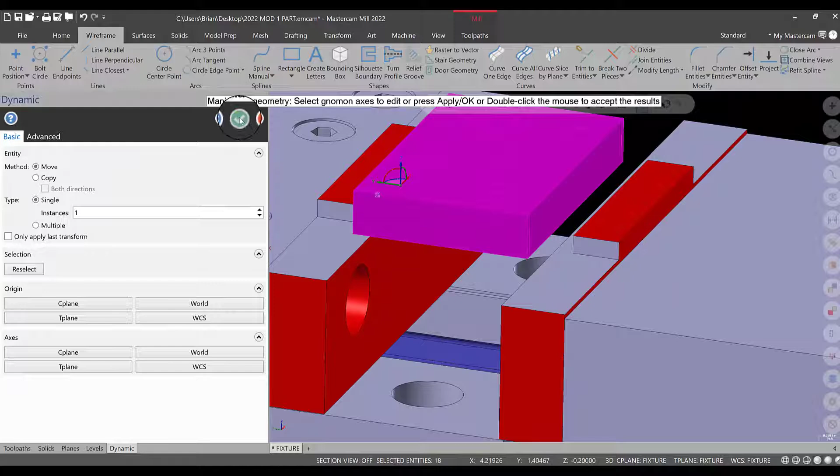So now I want to move this jaw in to represent this. So let's go into Transform, Dynamic, click those two, hit End Selection, and then we'll move this in. So we can go here, select the Y only, and then select the corner of the part and it'll snap to it. So we're good there. Let's hit green check. Right click, clear colors. So now our part is positioned.

So now what I want to do is have a new 0, 0, a new work offset. That is the part. That's going to be a new plane. So we have the fixture, which is there, and that's good for our fixture 0, 0.

We need to hit up here and go to Dynamic again, and so I'm going to select the top left of this workpiece right there. It's very important that you're on the outside here, because if you're on the inside where the actual part is, that's not there yet. You're going to edge find here, or probe there, wherever you're going to do it, and that's going to be the 0, and then it's going to machine away from there.

Okay, make sure Set As is correct. All of them are on. We're going to rename this as Part. Hit green check. So the part is on. The part is all set here. Again, I probably didn't go over this earlier, so there's only one. But you can move around and have different WCSs, different C planes, different T planes. So for us, for right now, make sure they're all the same.

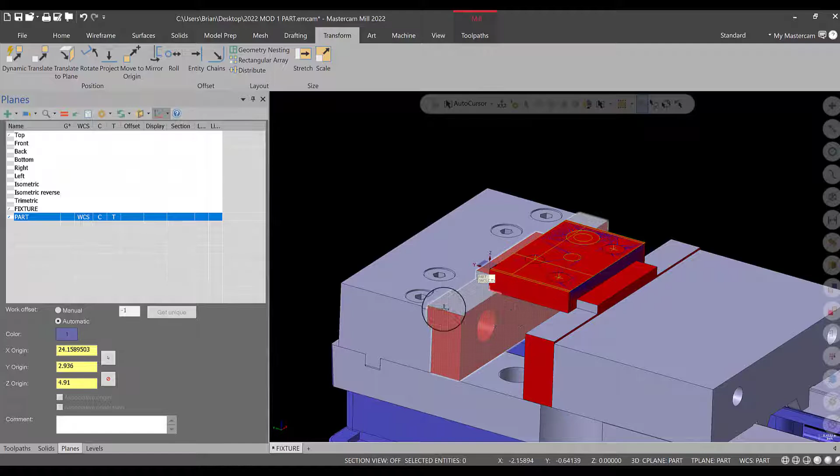Okay, we only have one work offset, which is 54, so we can leave this work offset as automatic. That's fine for now. We'll get into that. We have multiple work offsets later on. This part does not. It's always going to be 54 because there's no reason to keep this work offset, because this part can shift left or right. There's no reason to do that. So then we're good there.

So go to Toolpaths. And now what I want to do is position this in a way that makes sense. I also want to turn the levels I'm using on or off. So I'm going to go through and make sure I turn off all the 2D type things. Okay, we're good there. That's what we're looking for. Okay, so now I want to do a new view sheet by hitting the plus down here, and this is going to be Part. Then I'm going to right click and save view sheet bookmark. Make sure you watch the video on my YouTube channel on view sheets.

The nice thing is if I go to Fixture or Part, notice that the levels change and the work offsets change. So you can go back and forth and it saves what you have, which is nice, especially the planes, because right now the part is on, fixture is on, and vice versa. The only thing it does not save is the position of things, which is why that can get a little funky, because you'll notice that I move this jaw in, that jaw is in now. If I go to the fixture and I go to levels and turn my fixture cut on, it's there. It's going to cut that far apart.

If you put a note in there, there are ways to do that, to mark that. That's fine. You could label it in here. But again, sometimes if it's fairly advanced, I'd put a whole new vise setup in, copy this whole setup, move it over to keep them separate. But we're probably never going to cut these jaws again. Let's say this is a one-off part, or you would keep the jaws. I wouldn't worry about it. I don't think this part warrants it, so we'll try to keep this as simple as we can for now.

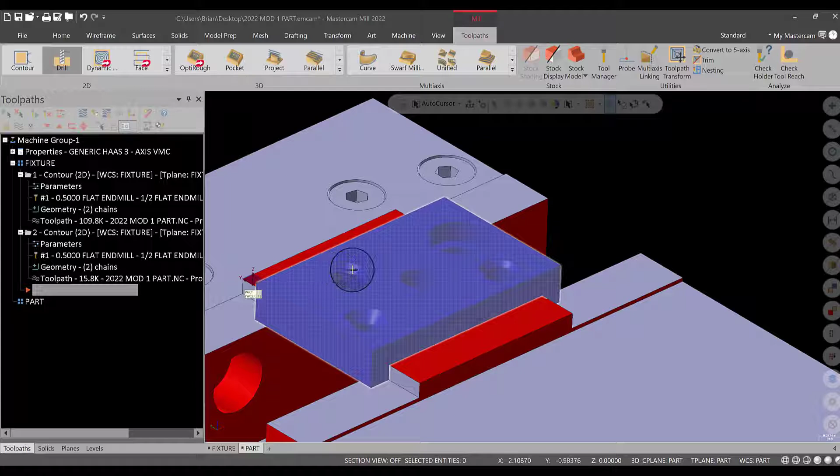What we're going to do is spot drill the 2 tapped holes in this countersunk hole. We're going to do other hole operations here. We're not going to drill them. We're going to use helix bore and circle mill for these. So first thing we need to do is get this red cursor down below part and then minimize our fixture toolpath group. Now in part, we can start our operations. This is where the next toolpath is going to go.

Let's select drill. All right, there's no chaining dialog box like contour. This is just going to be hole locations. So let's pick, okay, we can pick the surface of this countersink, and make sure that this is flush with the top of the workpiece.

Same way here, same way here. And there's other ways to select. You could do the whole surface if it's a hole. It could be a circle, things like that. But that's what we're going to do for this one. Okay, and then we can hit green check.

Now, these 3 holes are going to be drilled. The tool we're going to use, if we go to Select Library Tool, we're going to go to the filter. We're going to select None to turn them all off. Then we're going to go over to Spot Drill. So find on the list, Spot Drill. We're going to go equal to 0.375 or 3/8 of an inch, green check. There's a 3/8 spot drill, green check.

Okay, so there it is. Okay, that is fine. The speeds and feeds are fine for this. Notice they're a little bit slower because this would be high-speed steel. Let's double check our speed and feed calculator. Everything looks good. It's actually a reduction for drilling, 60% for drilling. So that's fine. We'll hit green check and we'll live with that.

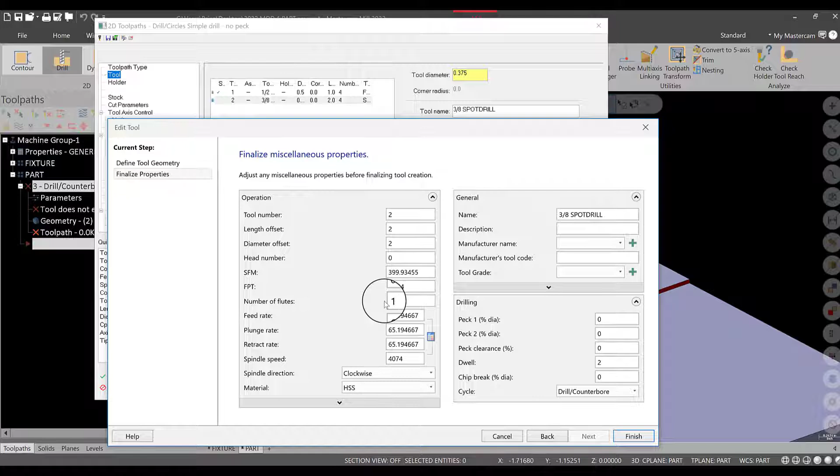One thing you need to be careful of, in my experience, is you've got to watch your feed per tooth, and then how many actual flutes it's calling for on the cutter. So this is 4. That's not accurate. In reality, in the shop, I always do 1 for drills, and the way I calculate my speeds and feeds is inches per rev. So when you're looking things up for drilling, it's inches per rev. So I always go 1 flute on my cutters.

And the reason for that is because even though it has 2, when you spin the cutter a full 360, or even when you spin it 180, there's no more material there. So you need to make sure that it's calculating essentially for 1 flute, because they're 180 out, if that makes sense. So as you advance the tool and the tool is spinning, and you calculate for feed per rev, you just do 1 flute, and that's what I do. We're good to go. So that did reduce. Okay, so that's right. All right, this is going to be comment spot drilling.

And then we get in here and we can go to cut parameters, and this is going to be drill counterbore. This is a G81 cycle, so that's what we're going to live with. Dwell, we're going to leave it. Nothing needed there. If you had other parameters, these would turn on. Tool axis control, we're not going to worry about. Hole segments, not going to worry about. Linking parameters, we are going to worry about.

So we will turn our clearance plane on only at the start and end of operation. We'll change it to 2 inches, and we'll turn absolute on for all of these. I think that'll help immensely. 0.1 for retract. Top of stock 0 is correct. The depth, let's go into here and use this little calculator. And we want a finished diameter. We're going to go to 0.3.

That's fine. The flat on most of these 3/8 spot drills is going to be 1/16 of an inch roughly, so that's fine. And then this will automatically calculate how deep we need to go to get this diameter established on the workpiece during spot drilling or countersinking. We're going to use that too. We're going to overwrite depth and hit green check. There it is. Tip comp we're not going to use for this. Everything else should be okay. Planes, make sure it's all part for this one. Coolant on. Hit green check, and there's our spot drill.

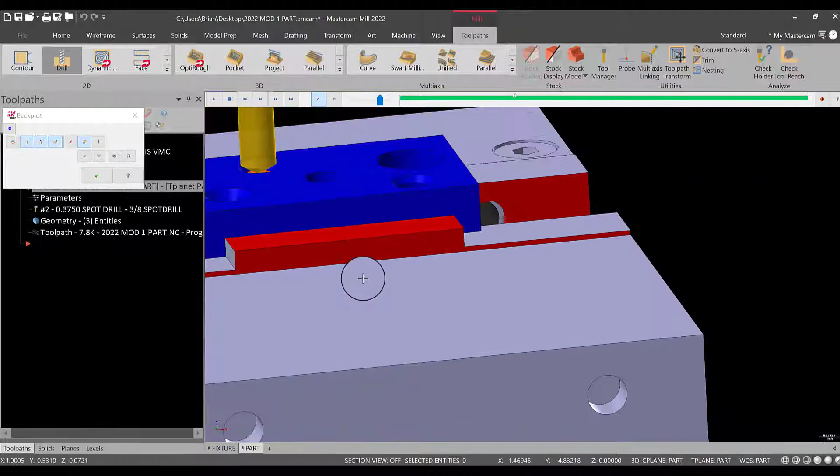Looks good. Okay, good. So the spot drilling is good. All right, we'll turn that off. And now what we can do is we can actually take care of drilling these, and they're going to be drilled separately. And the first hole we'll take care of is going to be this 5/16 tap drill for 3/8-16 tap. So let's double check the geometry here.

We'll right click and we'll go to Analyze Entity Properties, select that arc, and we should have an arc or a circle of diameter of .3125. We do. So now let's get in here and do a new drill operation. Let's select the surface of the countersink, which is fine. It'll give us a center point, green check.

Go to Tool, select Library Tool. Okay, make sure the filter's on. Filter, drill, 5/16, green check, green check. Speeds and feeds look okay. My mistake, bear with me, I did not click on it, so double click and there it is. I double click on this tool again, and I would make sure that number of flutes, that is okay. Alright, we'll go to finish.

The speeds and feeds look okay. I wouldn't worry about that. We are running conservative, so we'll leave that alone. Alright, even if we go to the 3/8 spot drill, the drill is getting smaller. It's a drill. The speeds and feeds are fine. I'm not worried about that for what we're doing.

Okay, I will show you later on how to change the speeds and feeds to a different material after you already did it. We are assuming this part is 6061 aluminum. When we get into the shop, depending on what we have, that may not be true, so I'll show you how to tweak that. For right now, that's fine. Okay, this will be 0.3125, or let's just go 5/16 drill.

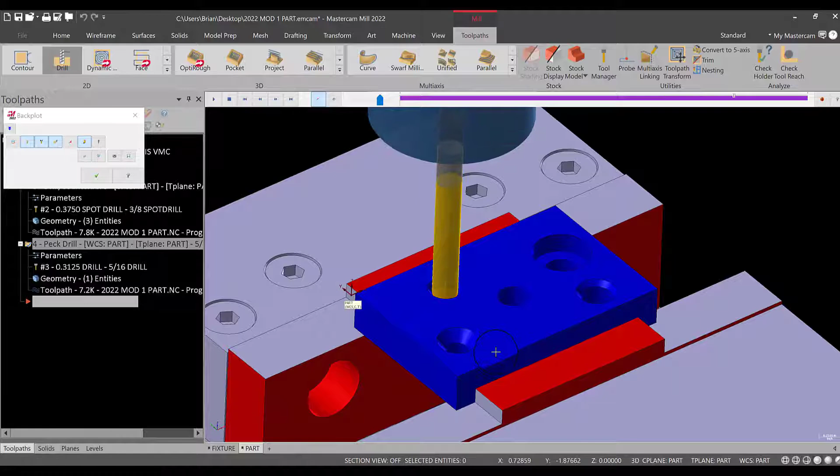Everything else should be okay. Coolant should already be on. Plane should be good. Everything is good. We'll hit green check and we're good to go with that operation. We can go to backplot and hit play. Alright, and watch what happens. So you see it peck drilling in. Okay? It looks good. Okay?

So, now what we need to do is tap that hole. Let's just take care of it now because these are going to be different sizes anyway. So what I'm going to do is right click, copy, right click, paste. Okay? And now we have the same operation twice. What I'm going to do is change the tools up and change the canned cycle. So I'm going to go to parameters.

I'm going to go up to tool, select library tool, go to the filter, turn the drill off, and then I'm going to go to taps, right hand. I'm going to ignore the diameter, go to green check, and then I'm going to go through the list. I'm going to find 3/8-16, which should be this one. Okay, right there. Green check. Okay, now when tapping, I'm going to use specific RPM for this.

But before we get into editing these for this tap, I'm going to go into cut parameters. I'm going to change it to rigid tapping cycle, not tap. Rigid tapping cycle, very important. Once that's done, I'm going to go to tool, then we'll go to spindle speed. I'm just going to go 100 RPM and click somewhere on the screen, and you'll see it automatically updates. And then you could back reference to make sure that's right. So again, it's going to be 100 divided by 16, which is 6.25, which is correct. So that's good to go.

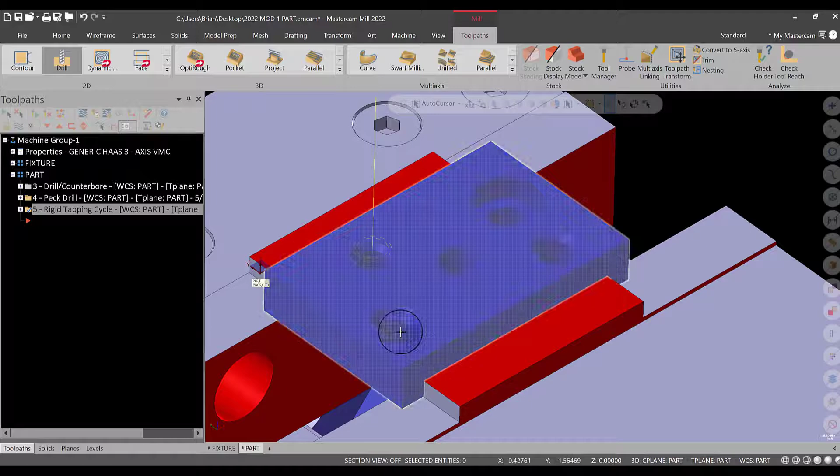So I'll let you catch up, get through the spot drilling of these 3 holes, get this hole drilled and tapped. I'll pause quickly. We'll take care of drilling this hole, drilling and tapping this hole, and then countersinking all 3 of them. Okay, so let's take care of this hole. So we know what drill to pick, let's get in here, right click, analyze entity properties, select this hole diameter, and we're looking for a 0.266 drill or something close to that.

So let's get into a drill operation. We'll select this geometry, green check. We'll go to tool, library here, select library tool. We'll go to the filter, taps off, drills on. Equal, let's see, 0.266, if there is a drill equal to that. There is, letter H, so that's good. We'll double click on that. So there's our letter H drill. We look good there. Speeds and feeds look okay. This is going to be 0.266 drill hole, something like that.

And then we can go back into linking parameters. Everything's going to be okay. Depth will be -1/2 an inch. Top of stock is there. Tip compensation we can leave on. Everything else should be okay. I always check the planes. And we'll make sure we double check our cut parameters, turn that back to peck drill, and we'll hit green check. So that now is complete. And now we can do one more, and we're going to do the tap drill size for this hole.

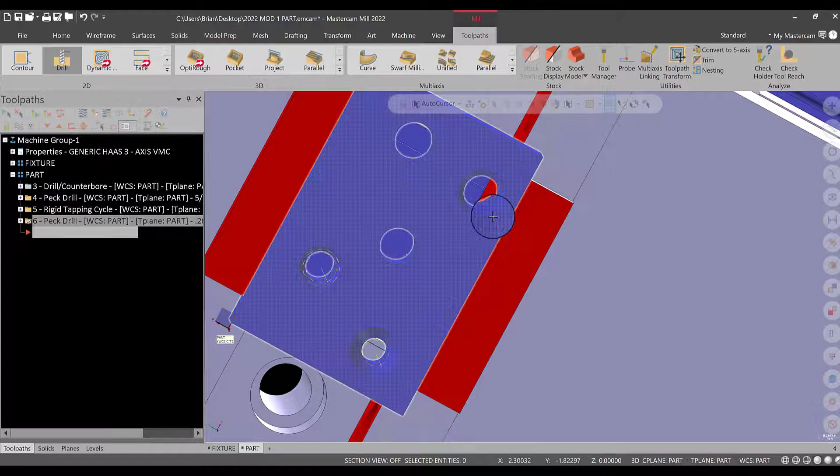Now, I am anticipating that we're going to have an issue here, and I want this to happen because I want us to see what collision detection does. Only a little bit, because this is real common to have an issue here. Or situations like this where you're going to hit the fixturing potentially. Now again, this is aluminum, so it's sort of irrelevant. These jaws are aluminum, so you could drill right into that and be good. But what I want to do is make sure that we get a collision, or just show you that.

So what I want to do is go to drill operation. We'll select here, green check. First thing we need to do is we need to know what drill to actually pick. So let's just X out of there. I'm not going to keep this operation. Before I do that, I go to analyze entity properties, see what diameter this is, and it looks like we're looking for a 0.368 drill. So drill, select, green check, and tool, select library tool, filter, and it should be 0.368. Green check. Letter U drill, good. Double click. There it is.

Speeds and feeds look okay. Cut parameters, peck drill's fine. Linking parameters, -0.5. Top of stock, 0. They look okay. Tip compensation on. Everything else should be okay. Green check. So there it is. Okay. And our drill, let's take a look. And I'll show you the actual verification here in a minute. We'll actually verify this hole separately. So everything actually looks like that barely hits. So let's see how this verifies.

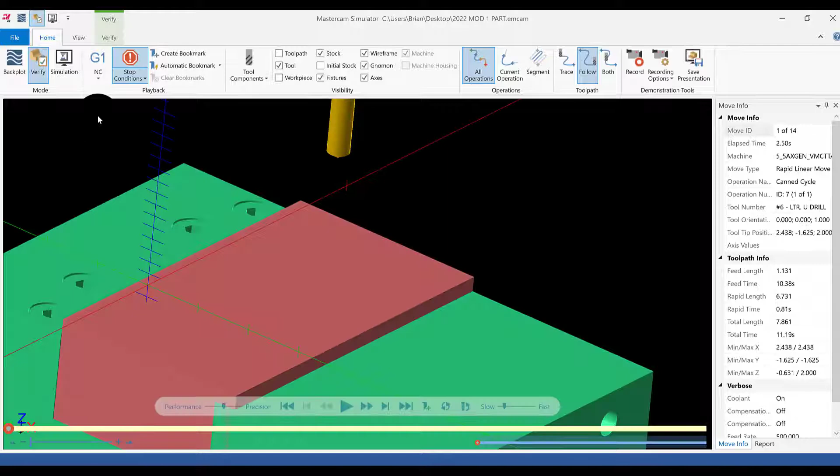So right now, we need to take care of our stock, and I didn't do the stock first because I want to show you what happens when we don't set up our stock correctly. Right now, if we hit verify, take a look what our stock looks like. Oh, looks like the vise jaws. Looks like our previous operation. It's no good. That's not accurate. So what we need to do is create a stock model, and we had a stock model. It's not a stock model as far as our levels.

We're going to use that in a minute, but what I'm going to do is go up with this red cursor to the top of this program, or the toolpath group underneath part. I'm going to go over to stock model. Alright, and what we're going to do is create a stock model. And the stock model is just something we reference as other stocks, as these stock models can be based on material you cut.

So you can see the results of your cutting and then apply that to other toolpaths for referencing. These are just other ways to create stock mid-program. There's only one initial property stock. These are the other stocks in your program, and you don't even really need the first stock setup method we did. You could use this the whole time. That's debatable; everybody has their own method.

So right now, the first thing I like to do with stock models is I always have them on top. I start with the stock plane on top. Then I'm going to go to model, go to the arrow, go to levels, turn my stock model on, turn my model off, and select this model. Okay, I just clicked it 3 times to select the whole thing. Hit end selection. So it should be good there.

Okay, for the color, a lot of times people pick gray. I'm going to go with something that's red, actually more like a pink color. And then the material, I'm going to turn it to glass, and that'll help us later on. There are no source operations because this is just the initial stock for the part. We can hit the green check, and there's our stock model.

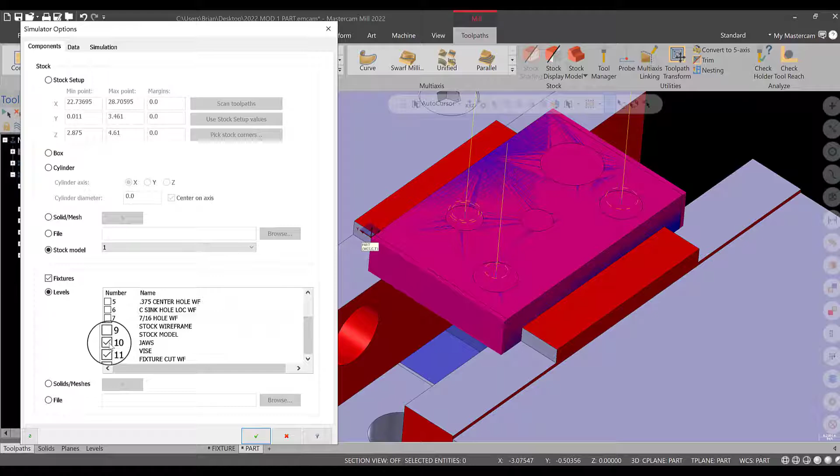So how do we fix verify? In our simulator settings, we're going to select not stock setup, but stock model 1, because that's what we left as the default name. Then in fixtures, I'm also going to have the jaws as the fixture, and hit the green check. Now, one other issue we might have: it might think it's crashing when tapping. So we'll keep an eye on it, see what happens, and we can go through fixing that.

So we can select all of these, and actually that was a mistake on my part because I selected these 2 here, so this selects everything. What I'm going to do is just select the part and make sure these are off, minimize it, and we're good to go. So by selecting the top of the toolpath group, you select everything below it. That's why we chain it or use this tree that way.

So this tree being here is very important. When you make a new toolpath group that you want to select all together, make sure you right click, new, groups, new toolpath group, and that these lines make sense, because it could be just another root under this tree here, and that's no good.

So we'll select part, go to verify, and see if that updated. That looks better. The only issue we have is an extra jaw out in space, which we will work with in a minute. So let's go here to stop conditions, op and collision. Leave those on. Verify is good.

One thing we'll do is go to file options, and make sure that collision checking is with fixture, machine, stock, not the workpiece. Make sure that's not selected, because then the tap will think it's crashing. So make sure that's off. Okay, so we're good there. And let's slow it down.

Let's hit play. So here's our spot drill. Here's our drilling op. There's the tapping op. Now I know it looks like it pecks, but it doesn't; you'll see in the code. It's okay. And then we'll peck drill, and then we'll drill this one. A collision occurred. So there is our issue.

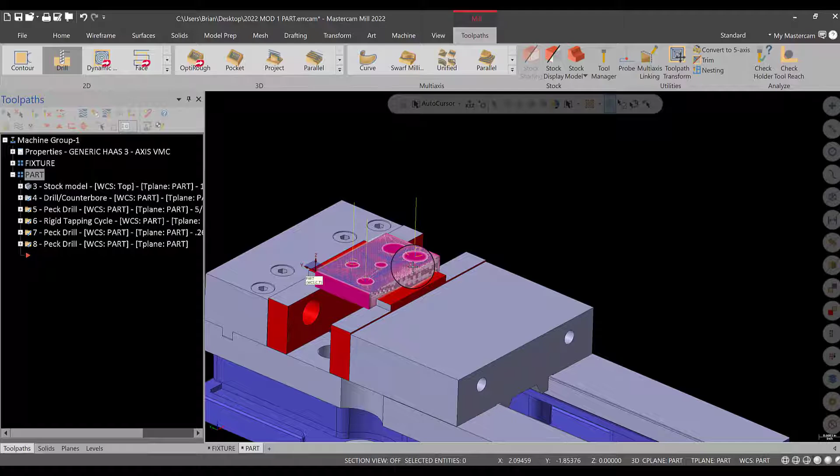Okay, so just to reference that vice jaw we had out in space, all I did was regenerate the operations by selecting part and hitting regenerate all operations, which is right here. Then I saved it and it went away. Can't explain it. Things do happen. If that happens to you, let me know. I'm anxious to see if that's something that happens, if it was in my process, but it went away for me without me having to change anything, so just something to keep in mind.

What we need to do now is go back and shift this jaw away by adding material to the face of the jaw here. Okay, and then update the toolpath to reference that, so when we cut them it makes sense. So I'm going to go to levels, and actually you don't have to do that, you can just go to fixture, and fixture goes to the work coordinate system we're working with, the gnomon we're working with, and the levels. Notice that the stock model's still on. So there we are, we're good there.

Okay, remember, we just can't shift it and move it. We were set up in a way that these were 2 inches apart. So a couple different ways to do this. You can draw a line, offset it over, then snap to it. That's fine. You can do the math and back from it. It's 2 inches from here to here. We just have to move it over the amount to get 2 inches in here. That's fine too. One other way we can do this is actually just move it, then move it back, which is fine too.

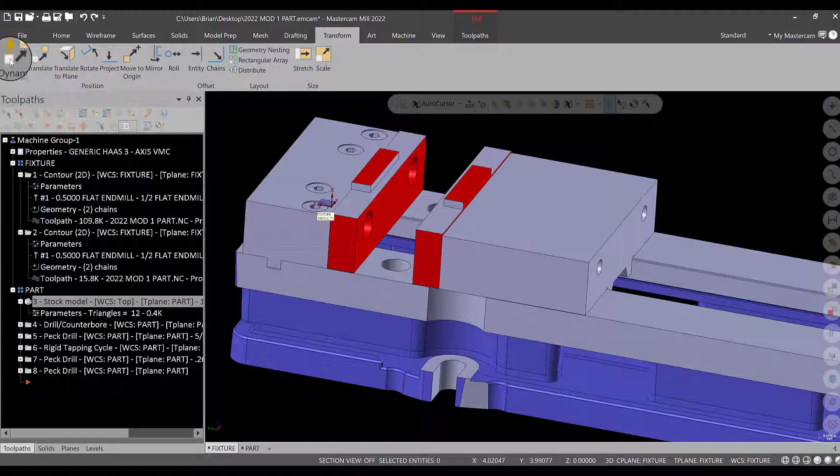So we'll go through dynamic translate, dynamic, select these two, end selection, select this corner, select the Y-axis, and select the corner of the other jaw. Be very accurate with this. Okay, so that's good. Hit apply. I'm going to select these two again and hit end selection. I'm then going to select the corner again, select the Y, and bring it back minus 2.0. Enter. Then I can go green check.

So I can clear colors now, and then quickly right-click, analyze distance, select this line to here, and it is 2 inches away. Because remember, we're going to clamp on a 1-2-3 block in there. Now we're back. If we turn our fixture on, we're back where this makes sense. So what we need to do is update this model. We really don't have to update the model itself. We will, because it will look different. You want to make it as real as possible. That really helps. If you don't, you can fake it out, draw geometry, and then, oh, it's not there at the machine. That doesn't help with our planning, and we wouldn't have caught that little collision there. So it does help to be accurate.

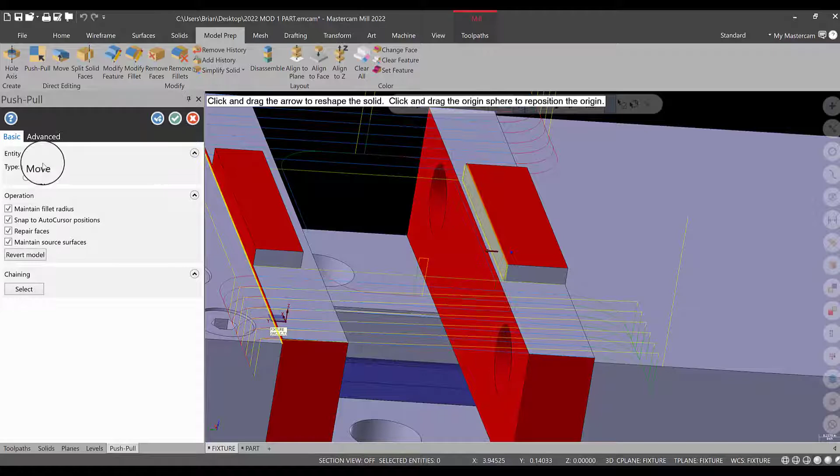So for right now, I am going to go to levels and turn on the fixture cut wireframe, because I am going to reference this line. This line is going to move. But for now, on this model, I'm going to go to model prep, and go to push pull. I'm going to select this boss and move it. That's 200 thousandths. I'm going to move it 0.150. Enter. Enter. So that shifted that jaw in, and that'll work for us. We'll hit green check. Now, the only problem is our little line that we applied geometry for is in there. Let's leave it for now.

I want to make sure that my fixture cut wireframe is on. I want to go to wireframe, Curve One Edge, select that line, and hit green check. Now we have a new line. Go back into toolpaths. The contour pass that cuts that step is op2, step in jaw. We can go to geometry, and this is how you edit your chains. There's chain 1, there's chain 2. We can right-click and delete chain 2, then right-click and add a chain, this new chain. Hit green check. Green check, regenerate the operation. So now that updated. But I do want to get rid of that line. You don't have to, okay? But to do that, I will go to levels.

I will turn the jaws off, select this line and hit delete. Turn the jaws back on. And then what I want to do is check this program, okay? And I want to check it in backplot because I want to see the jaws. So I want to go both of these, and actually not even really both of them, just the second contour will be fine. We'll go here, and we'll hit play.

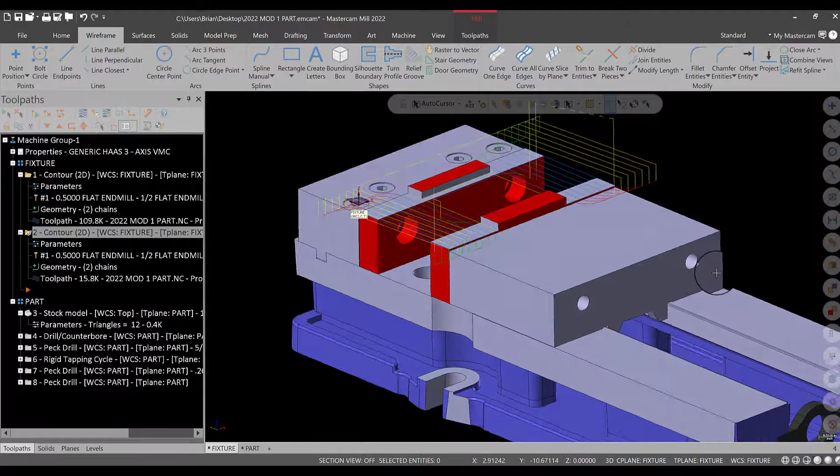So this side should be fine. That looks good. And now this side looks good. So now we just modified the program to cut the jaws and the model, or, you know, the actual, I guess you want to say, tool design of the jaws. So now we go to fixture and turn both of them off. We can go to levels. We could do this individually, or we just go to part.

Okay, so now we're ready to bring our jaw back in. So then we can get back in here and go to transform, dynamic, select the jaws, end selection, select the corner, the y-axis only, and bring it to the edge of the workpiece. Okay, we'll hit green check, clear colors, and now we should not have an issue with crashing. It looks like we have enough space, but let's run it anyway.

So we'll go to toolpaths, we'll go to the part, we'll minimize the fixture, we'll go into verify, right click, fit, and then we can go isometric, or we can go isometric reverse, which I prefer for having a work coordinate system set up the way we do. Then we hit play. And you'll see the colors changing. That's because color loop was on. That's what that does. Spot drill, drill, tap, drill, and drill. No collision. So we just fixed that collision.

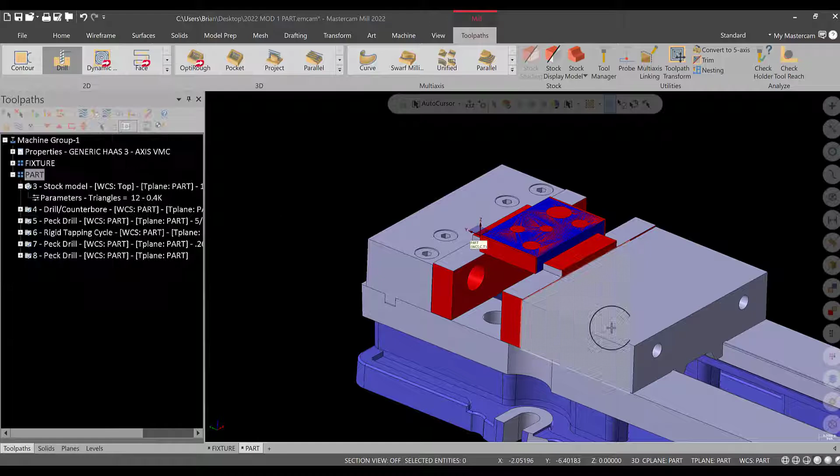So allow you some time to do that, and then we'll come back, we'll tap the holes, we'll countersink, and then we'll get into other hole operations. They're actually milling, but they're in the hole making toolpaths area. Okay, so let's get in here and let's go to levels and let's turn off our stock model, and we'll go back into toolpaths. And we're good to go here. When we turn it on, we'll see all our ops, but we don't need that for now.

What we need to do now is use our red cursor and bring it down to the last op right at the end here. And now we can get into actually tapping this last hole that we had to update the fixturing to achieve. Otherwise, we had a little bit of a collision. So what I want to do is go to drill. This is kind of rinse and repeat here. So we'll select this geometry, green check. And this has already been tapped. So we can go in here, tool, select library tool, and filter.

Go to the right hand taps, equal, and this is 7/16-14. I will double check that. Yep, 7/16-14. Get in here, select that tap, green check, and then what we can do is go to cut parameters, go to rigid tapping cycle, go back to the tool, update the spindle speed to 100, click on the screen, and then we'll do our math. It's going to be 100 divided by 14 equals 7.142. Yep, that's correct. That's what we want. Comment is going to be 7/16 tap, all right?

And then let's see what else we got here. It's good there. We're going to get into our linking parameters. The depth is going to be down to 1/2 inch. Top of stock is 0. These are okay. Tip compensation is fine. We're going to have to tweak this anyway, most likely at the machine. Change the Z minus in the tapping cycle because we don't know what tap we're exactly going to use.

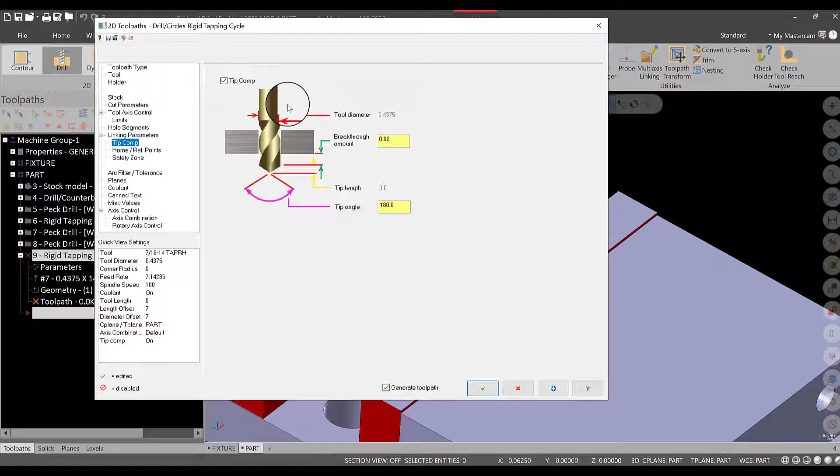If we're using a form tap and we have to change our tap drill size for that, we can tweak that. You know, if it's a very long lead in to get full threads all the way through, you have to be accurate with how the tool was designed for the software to realize it. We're just using the default tool, so for right now this is fine. I do want to double check my planes. That is correct. We'll hit green check. So there's a tapped hole.

I do want to just check this hole here. So let's just hold control and select the two 7/16 tapped hole features. Verify. And now we'll only verify those two, and it'll save us some time. So we'll go through there. Now, what happened? Okay.

Let's take a look. This is the tapped hole. Let's see where this is. So, what we had is if we actually look at the operation, okay, they are mismatched. We did the 7/16 hole first.

So, how do we move this around? And also, we should label this. This should be a U drill. It is. So if we hold that, this should be, let's just go 7/16 tap drill, or even just drill. I'll call it U drill too if you want. It's fine. They're a different order. I don't really want that. So how do we change that?

Go up, okay, to there. Right click, cut. Right click, paste. I like the cut, copy, paste method of this. You can click and drag and hold, but I think it's more accurate to do with the copy and paste. That's me. All right.

So now we'll select op 8 and 9 and see what happens. It should be doing just those two holes. So it should, if I slow it down, peck drill here, and now it should. You hit play, and it should tap it, and we look good. There's plenty of clearance, so that should be fine.

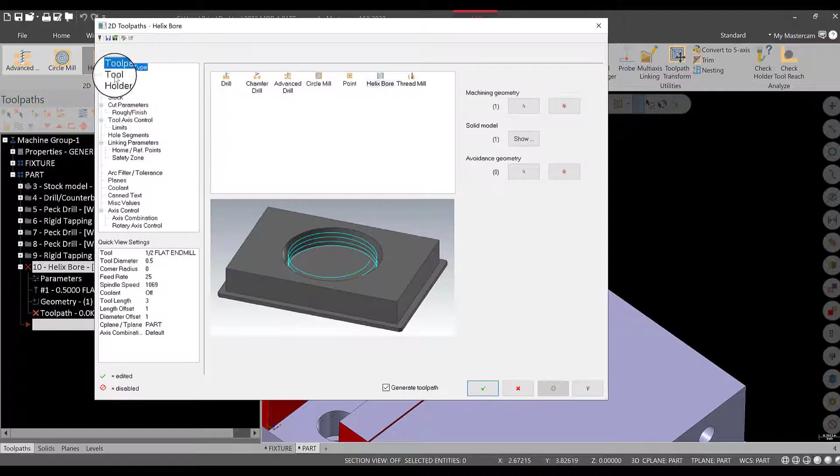This is a 3/8 hole. So that means we need to go and find a tool that will fit in there. And actually, you don't want to use, even 5/16, 1/4 inch is going to be ideal. You want the tool to have some clearance to move so that the chips can get out. So we use a flat end mill equal to 0.25. We'll go green check. Select that cutter.

Okay. And our speeds and feeds look okay. That's fine. Rapid retract is fine. This is going to be helix bore 0.375 hole, something like that. And then we can get in our cut parameters. We want to change our compensation up to wear. We want to leave nothing on walls and floors for now.

All right. We want to start at center, end at center. We want an overlap of 20 thousandths. Okay. Perpendicular entry we can turn on also. That's fine. And the entry arc exit sweep. These two we might change in a minute, but I want to show you what they do first, and then we'll come back and edit it.

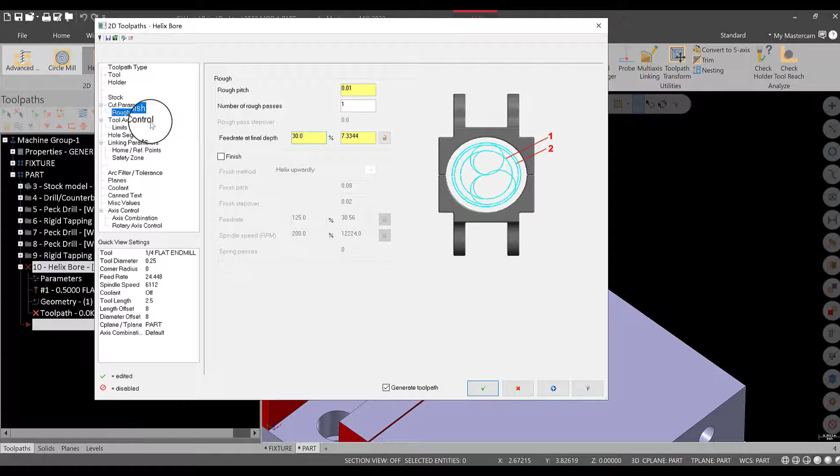Roughing and finishing. I'm going to put a rough pitch of 10 thou. Okay, one rough pass. Feed rate at final depth you can reduce to 30%. That's fine. It's not going to be taking much material. It's just cleaning up a little bit because we're not leaving anything to finish. And we're not really necessarily finishing separately. We're just going to helix all the way down, and that'll be it. That'll be fine for what we're doing, just for showing you this tool path.

Linking parameters. The depth, we're going to go down to the bottom of the op. Okay, absolute, going to be minus 0.5, and I'm going to go past a little bit, like 510. Top of stock is 0, everything else is absolute. Clearance plane on, 0.1 for retract, and we're going to go 2 inches on clearance. That's good. Arc filtering.

We could use this now and do output 3D arc entry motion, but I'm not going to worry about that. We'll cover that later. I don't think this is necessary. Coolant should be on. Let's just take a look at this toolpath. Green check. There it is. The end mill is helixing in. Okay.

All right. So let's watch that in backplot. And you'll see the cutter work its way in. Now, take a look at this green lead-in, all right, and let's tweak that around a little bit. So, we'll go to Tool, or I'm sorry, Cut Parameters. Let's change the Entry Arc Exit Sweep to 90. Hit green check, regenerate the operation. See the difference. Okay.

Go to Parameters again. Start angle, could be at 90. Let's go 45 degrees. Check, regenerate. See what that does? It moves the angle of start point around. Okay. Perpendicular entry. Turn that off. Green check. Regenerate. See what happens. Okay. So that's not bad.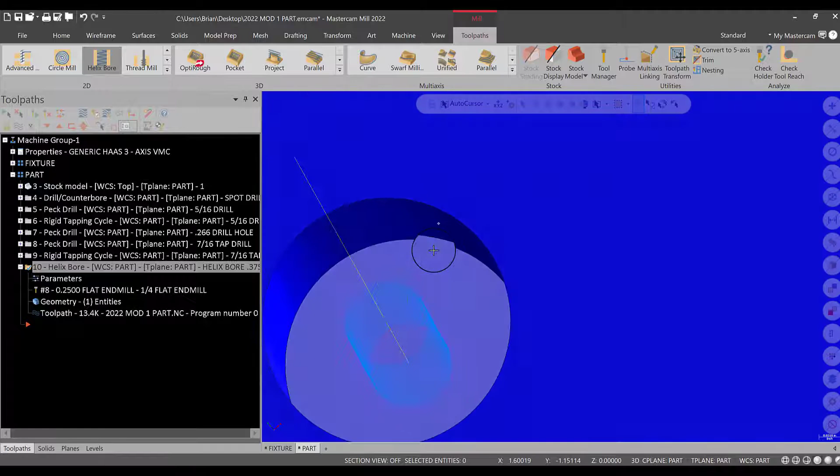It'll have enough room to turn the comp on here. You've got to start your comp with a linear move and then radius its way in and go. That is a good toolpath right there. So lead in, lead out. Okay. I was just tweaking these to show you what they did. So it's sometimes easier to see what it does versus reading what it's about or listening to me.

So there's a helix bore toolpath. They're pretty accurate. If your machine's tight, it'll give you a good hole diameter, and you have the ability to comp it in. So that's just an example there. So that operation is done. And now what we can do is a little different here. We're going to use what's called circle mill, which is sort of like helix bore. So it's going to ramp in, but then it's going to go to a depth and work its way out. So it's not going to helix all the way in like helix bore. It's a little different type of setup.

Okay, so I'm going to pause here. Finish your helix bore operation for this hole, and then we'll finish this last hole, and then we'll mill the ends, and this part will be complete.

Okay, for this circle mill operation, it would be ideal to pre-drill this. It is always better to pre-drill when possible. It's easier for the end mill to just plunge in, work its way around. End mills don't necessarily like to plunge in or even helix in like we're doing here. But the main purpose of this exercise is to give you some experience with the toolpaths in the hole making gallery of the milling gallery here. So we're going to work with circle mill.

Okay, and what we're going to do is circle mill the counterbore, then circle mill this bore, all using that 1/4" cutter from the helix bore. And again, that may not be ideal. You may want to use 2 different cutters, rough and finish. I'm not worried about that for now. This tolerance is somewhat tight, so you may want to use a separate cutter for this one. But this one here has a somewhat loose tolerance, so it's up to you on that. I'm just going to use the same cutter because again, I am just worried about the practice here.

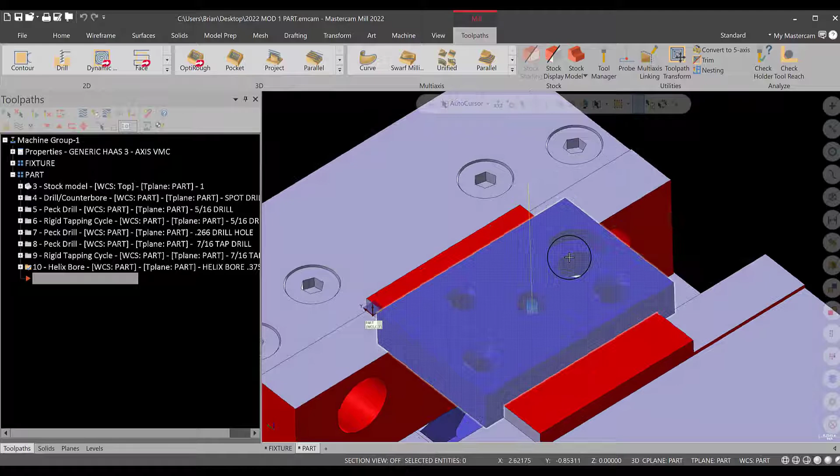So if we go to make this, just realize that you will have to hold the tolerances. We are only making one part, so in reality, if you comp this one to size, this one should be in tolerance. So take that for what it is. Just know that instead of roughing and coming back and finishing with a separate cutter, I'm trying to save some time here and just take care of the main operations. So knowing that, let's get into circle mill.

And I'm just going to select this upper arc right here at 719 thousandths in diameter, green check. We'll take care of this one first. So for tool, we are going to use that 1/4" end mill, tool 8. This will be C-bore.

Everything looks good here. Cut parameters. I want to use wear comp. I'm going to leave nothing on the walls and floors. Start angle 90 is fine. Now for roughing, we do want to put roughing on. I'm going to use a 25% step over.

All right. And helix entry is fine. We'll helix in. All of this stuff should be okay. We'll go default here. Z clearance, I'll go 0.025. That'll save us some time. And I am going to use a plunge angle of 1 degree. We'll take it nice and easy here. All right. If helix fails, skip. Leave that on. That's good.

Finishing. We'll go to finishing. And this is where if you wanted to rough it, then do a finish pass or a leave amount, the spacing is what you would leave to finish. Okay, you're only going to want to finish at final depth. So if we did want to rough this out with the helix and then come back in and finish it with the same cutter, we could leave 3/1000ths here.

We could also override the speed and feed for a finish pass. Not worried about it. We'll go to final depth. We'll turn the finish check on, 1 finish pass, and the spacing is how much you're leaving to finish. Okay, transitions. Make sure we turn lead in and lead out on. This is critical. This is fine, and the overlap of about 20/1000ths. And then we'll take a look at that in a minute.

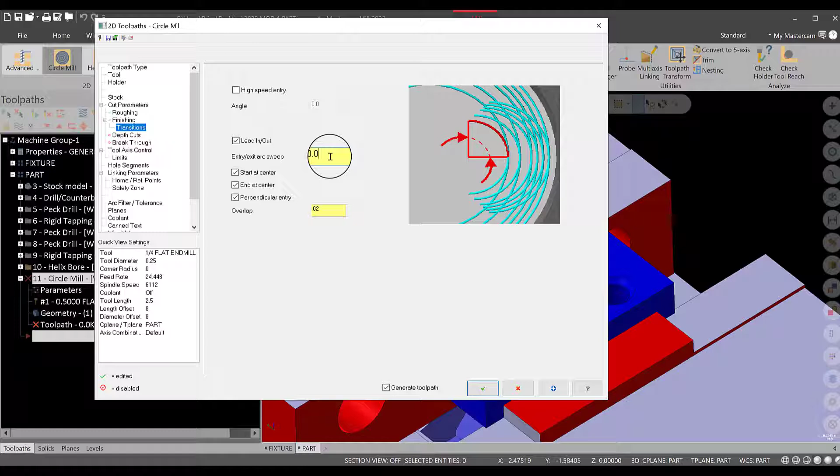The entry arc sweep of 90 will probably be okay. This is a good size area here. If not, we'll tweak that. Depth of cuts, we'll use depth of cuts this time. So max rough step, let's go 50/1000ths. And we'll just leave 1 finish pass. And this is if you want to finish bottom. We don't, we'll just go to 0.

Okay, override speeds and feeds. Everything looks good here. Tool axis control we don't need. Hole segments don't need. Linking parameters we do need. Get back into here. Again, kind of redundant. Change all these to absolute for what we're doing. This will just avoid issues later. Change our retract to 0.1. Feed plane to 0.1 is fine. Top of stock is good.

Depth, we'll select the bottom. Here. Alright, minus 1/4 inch. That's good. Double check the planes as part. Coolant is going to be on. And then we'll hit green check and see what it comes up with. So, we'll take a look here. Okay, it looks pretty good. You could see our lead in and lead out for the circle mill passes.

Okay, so let's take a look at this in backplot just to get an idea what the tool's doing. And we'll get into backplot just as one operation. I will slow it down and hit play, and we'll see what happens. So it's going to helix in, just like helix bore. And then it's going to circle mill out at that depth of cut. Okay?

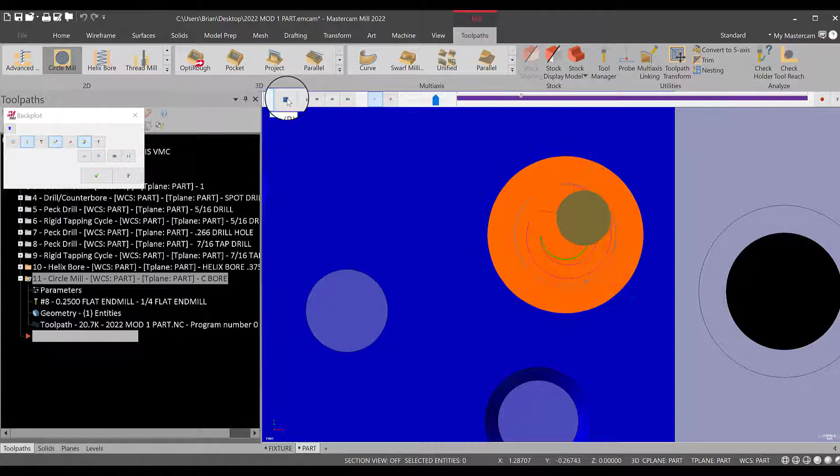Right there. Okay. So, let's go to top view, and I want to show you something with that spacing. Let's get into backplot again in top view. Let's turn toolpath verify on. Let's turn the holder off and hit play. And we'll let it do one pass. Okay. So if we look here, you'll see the gap. That's our 3 thou gap. If we let this run all the way through, we'll zoom right in. Now the gap is gone.

That's spacing. So it's very important to know that. Let's say, for whatever reason, we get back into finishing, and let's change this to 50 thou, something good size. So regen, backplot it. All right, hit play. See the size of the spacing now? It's 50 thou. So the spacing is how much you want to leave to finish. Okay, so we'll go back to 3 thou. All right, finish was only at final depth. That's fine. And I'm going to put keep tool down on for this one.

Green check, regenerate. So we just did the counter bore on this workpiece. Okay, so now we can right-click, copy, right-click, paste, and now we can use the same toolpath with different geometry. So I'm going to rename this one as C-bore clearance hole, and I'm going to go into the geometry, but before I do that, I'm going to pick the previous circle mill toolpath and turn it off so I can see what's going on. And since this one's off, we'll turn the helix bore off too. We know that what I'm looking at is this operation.

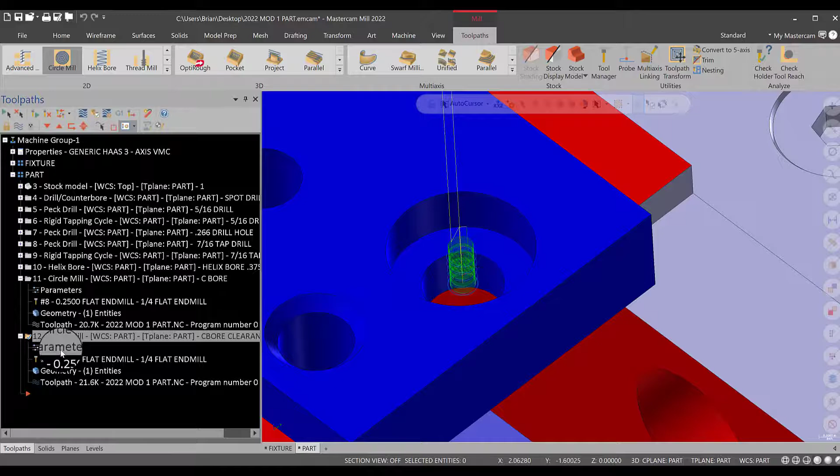Regenerate the operation, and you'll see that, well, our linking parameters aren't correct. Go to parameters. We're going to go into linking parameters. We're going to change our top of stock to right there, and our depth to right there. I'm going to change this to 510 to give it a little extra.

Now, you have to remember that some of these, if they're incremental, are based off something else. Since these are all absolute, the feed plane, everything, and retract all come from 0, 0. The problem is the feed plane is going to be feeding up in space. Let's hit green check, and you'll see what I'm meaning. The feed plane's up here.

Okay, we could turn that to incremental and get rid of some of these, but for right now, I'm just going to leave it, and we can watch what happens. And overall, it's not terrible. I'll probably leave it for now. We'll go to top view. Everything looks good, so I'll probably leave that for now. I don't think it's worth going back in and trying to get rid of some of these lines. I think it's fine for now. I wouldn't worry about it. It gets the point across what I'm trying to achieve for this lesson.

So now, all the holes are machined. The only thing we need to do is go back in and take care of these countersinks. So what I'm going to do is I'm going to pause here. We're going to come back with 3 different countersink operations because they've got 3 different depths. And we will machine these 3, and then we'll come back and we'll do the contour and we'll be done.

Alright, so let's take care of the countersinks, not the contours, I'm sorry. Then we'll do these contour operations last. And so to do that, let's do 3 different holes, okay? So we'll get into here and go to drill. And in drill, I'm just going to start by selecting this geometry, which gives a 425 diameter, which should be good. We'll work with that diameter. That's the outside of the countersink.

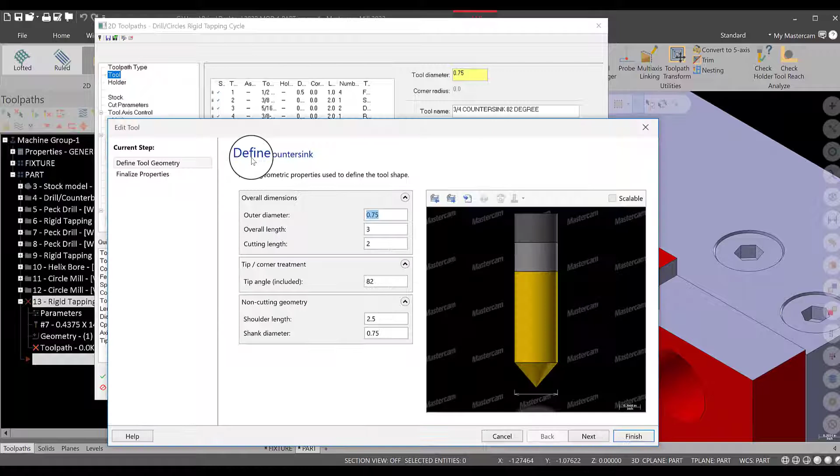Double check. You gotta make sure. I'm not sure in the shop. Usually we have one flute countersink, so we will update that. That's good. And this will be C-Sink 3/8-16. All right. Cut parameters. I am gonna go just to a drill counter bore. I'm gonna dwell for 0.4. Should work. Okay, that should be 4 seconds if I'm right, but we do want to dwell, so we'll keep an eye on the code and what that looks like.

Let's go into here, linking parameters. Now, everything should be good from before, except for top of stock. We're going to want to fix that to 0. The depth. So, in theory, this tool, at least the ones I know in the shop, you call them 0 for the tip. There is no flat the way they're touched off. But the finished diameter on this example is going to be 425. So we'll get back into linking parameters and type in 0.425.

Overwrite depth, green check. All right, tip comp is off. Everything else should be good. So let's hit green check. Now, let's watch this in backplot. And if we watch it, it should stop at the end without retracting. Okay, and I lied. So we'll come back into here, and what I'm going to do is just hit B for back, and it goes right here. And that's where it stops.

And that looks pretty much right. Okay, so the calculation looks good. You just got to make sure that there is no flat on the tool. The ones that we have are sharp. So there's our spec. So that's good. So now what we have to do is go to the rest of these. All right, and what I'm going to do is I'm just going to right click, copy, right click, paste.

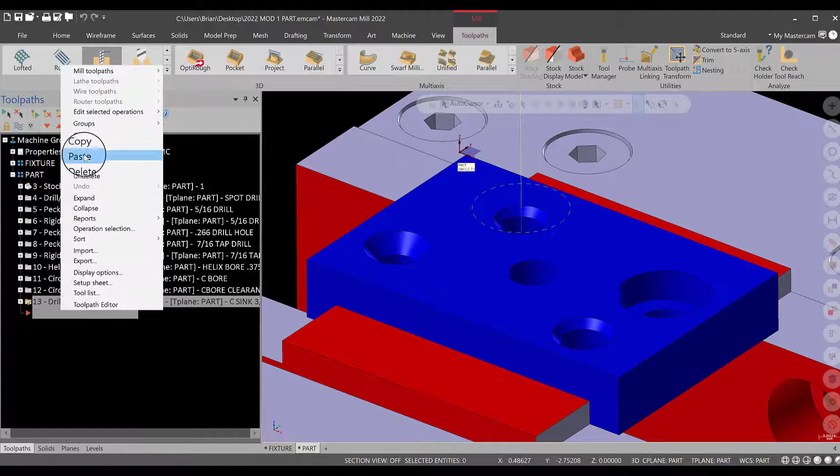And I'm going to go to geometry. I'm going to select this geometry. I'm going to get rid of the solid feature one, or just delete that one. So we're just going to 0.487, green check, parameters, and I'm going to go into, just so my memory's fresh, it is 0.487. I'm going to go into linking parameters. I'm going to go to 0.487, overwrite depth, green check, so we should be good there. Everything else is okay, green check.

Let's watch this one in backplot. So I'm just going to hit S to skip forward. So there's S, we look good. Oh, S and B will go through this. Okay, so that's good. And then we can copy and paste this again. So I'm going to go just right click, paste. I'm going to get back into here.

I'm going to go to geometry, delete this one, and then add this one, 0.51. Okay, parameters. Change this finished diameter, 0.51. Green check. Okay, green check. And we'll watch this one. So S. Okay, looks good. So all of those are countersunk.

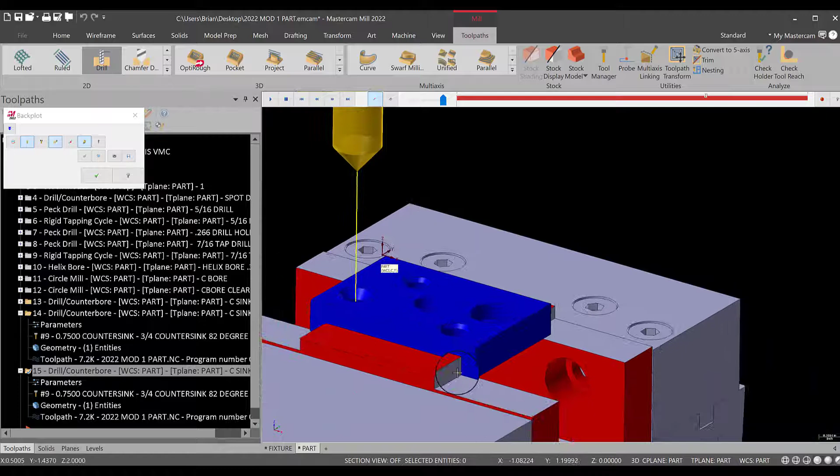We could go back in here and deburr these, but we're not going to worry about that for this operation. It should be pretty self-explanatory, so if you want to do that, great. All right, that looks good. So the only thing we need to do now is relabel these. So let's label this one. So click on it and move.

And this is C-Sink for 7/16-14. And this one is C-Sink for lower left clear hole. Something like that. Okay? So now those countersinks are done. So what we can do now is I'm going to hold Control on the keyboard and select all 3 of those and turn the ops off.

Now what I want to do is a contour operation to mill this to length. Okay, so I'm going to go into toolpaths, get into here, and I'm going to go to contour. So now we don't have any wireframe geometry here. We could put it there and work with it, but what I want to do is show you 3D features. So that's why this is what we've been using. Since there's no 2D geometry, this defaulted to the Solids tab up here, which gives you a different selection method window. So you see loop, edges, all these different options.

I want to go just to edges, turn loop off right here. So edges only. Select this edge. Okay. Hit end chain. Select this edge. Change direction so that the cutter is climb cutting. Green check. Different way to select geometry using just the 3D model, and we will use those over and over again as we continue all the chaining. That's just both in one module. You'll get used to that as we go.

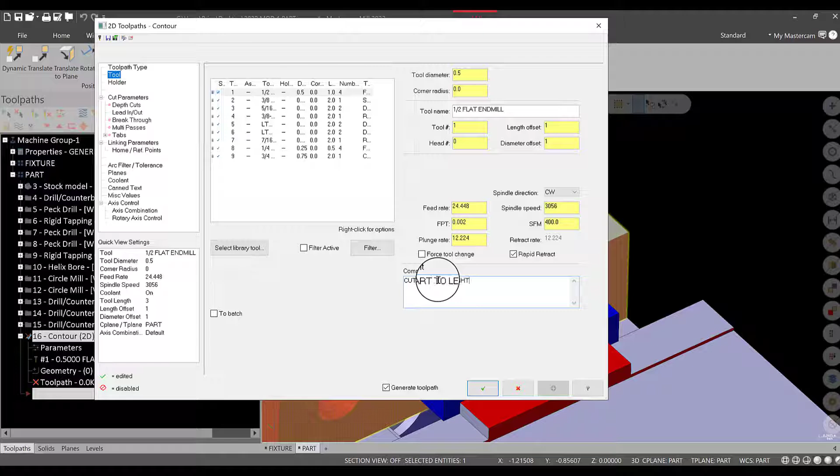So the tool is going to be our 1/2 inch cutter. This is going to be cut part to length. Okay. Cut parameters. Everything should be there from the previous contour. Depth cuts we're not going to worry about. Lead in, lead out is fine. We're going to go a depth of -0.5. Top of stock is good. Everything's good there. Planes is good. Coolant should be on. Alright, so everything looks pretty good. So what we'll do is hit green check.

And there are our two contours. So if we watch these in backplot, there's one. There's two. You imagine the cutter's going clockwise, so that looks good. And that's what we want. Okay? So now what we can do is save. And now we can get into verify and watch this run. So I'll select part, make sure all these are checked. I'll go to verify. It'll load up. And I can watch this run.

So we'll hit play. Spot drill. Drill. Tap. Drill. Drill. Tap. Helix bore. Circle mill 1. Circle mill 2. Countersink. Countersink. Countersink. We'll slow it down here. And mill to length. So now this part's complete. Alright, we have no collisions, nothing happened, everything looks pretty good.

Again, if you wanted to deburr these, you could. Two different countersinks, you could deburr all the way around the workpiece. This is what we'll do later on, but we're not going to do that for this example because we're already getting pretty long with this video.

So we'll X out of there, and then what we can do is look at our code. So we'll hit G1. Green check. It's going to ask us if we want to post all. No, we just want to post what we have selected. And then we'll hit OK. Save. Yeah, we can replace it. It's fine for now. Because again, I usually save as after this onto my flash drive.

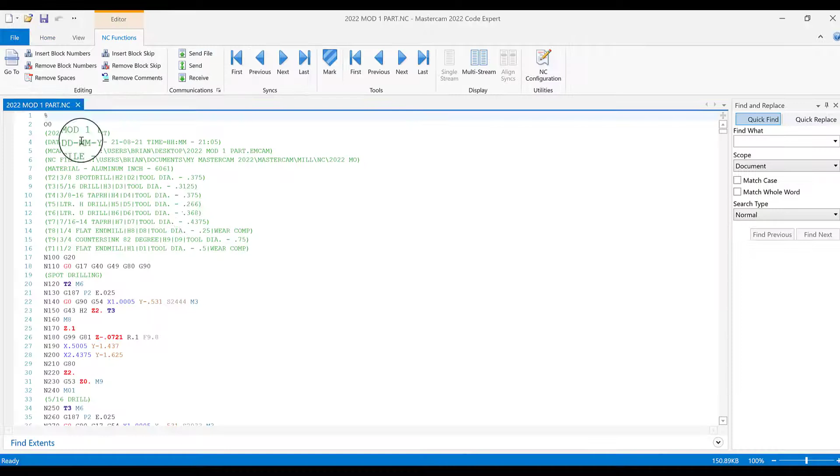Okay, so here's a program. I'll go 2021. And you'll see there's spot drilling, 5/16 drill, 5/16 drill. And it looks like this one we need to update. This is tap drill. This is actually the tap, so we could update that here. So just tap. Okay, so again, you could change that in the program, or you could just change it here.

There's our G84 going down. That's good. Okay, 520 is actually pretty close, so that might work depending on what tap you're using. 266 drill. Here's our G83 with the Q value for pecking. There's our G83 for the tap drill. There's our G84 for tapping. Okay. Here's a helix bore operation, the helix is using comp left on diameter offset 8. And it works its way down. There's a lot of code for that.

Okay. So one thing I want to point out is take a look here. We're at 9,000 lines of code, even though it's only 1,000 because it's skipping by tens, if I remember correctly. Notice how it restarts at 10,000. Let's fix that because that can really burn you at the machine if you want to edit. But before we fix that, you can see we come through here and you'll eventually get into your circle mill, clearance hole, get into the smaller circle mill.

Okay, and then it gets into cut the part to length. Countersinking. Okay. There's our dwell right there. Alright. So everything looks pretty good. Okay. I'll pause the video after this so you can get out of here. And what we need to do is get in our control settings and we'll update this N line number so it doesn't restart at 10,000 every time, which can be a major issue.

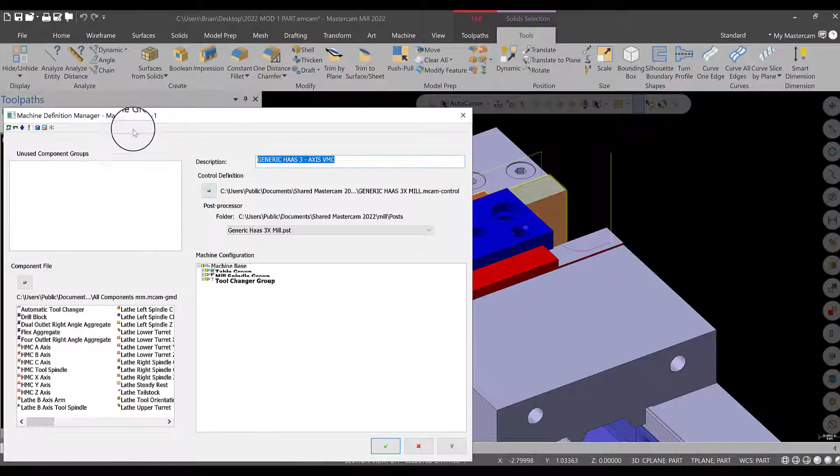Okay, so I'm just going to X out of the Mastercam Code Expert, and then I'm going to clean this up quickly, and then I'm going to go up into Properties, Files. Then I want to go to Edit right underneath Machine Toolpath Copy. So I'm going to hit Edit, and then we need to go into the Control definition, which is this little control icon box here. So select that and let it load.

Alright, we need to go to NC Output, and this is where we have our sequences here. So what I want to do is start the sequence at 1, increment by 5s, maximum, add a couple 9s in there. Okay, then hit green check. Alright, yeah, that's fine. Green check. Let it apply. So I'm going to select all these. I'm going to go back in to look at the code, post the code, and take a look at it.

So you do want to skip a little bit. Skip by 5s is fine, because it allows you to insert lines easily into the N numbers. And we could delete the N number. Sometimes you don't need it, but some of these longer programs you want them. It depends on how quick your program is. So now you'll see that we have N1, 6, 11, and it goes by 5s. We could start at N0 if you wanted to, but this is fine. And you'll notice that we go right up to 25,000, because we're skipping.

Okay. So we're good there. Obviously it's not going to match 1, 2, 3, 4, 5 because of all this information on top, which is defaulted. This tells you your tool information, H value, D value, what kind of comp it's using, which is really handy, so leave that. But there's a limit here, so sometimes you got to delete some of this, so just keep that in mind. But again, we got rid of the restarts and the numbering. That's how that works. This is ready to go to the machine.

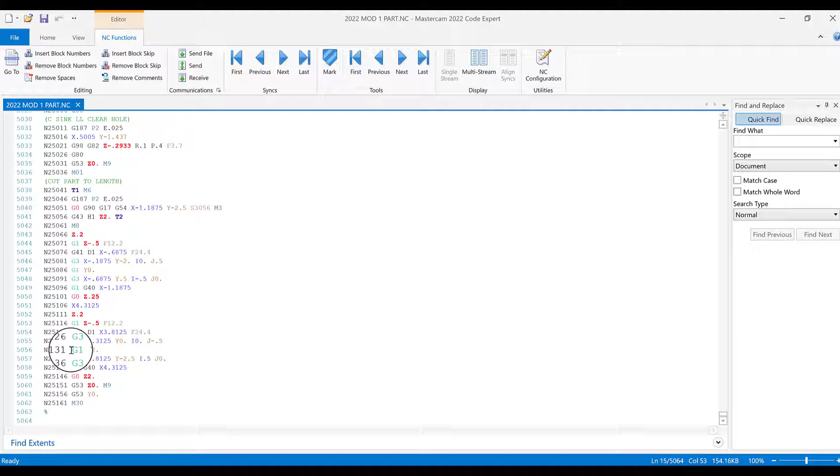We just finish this, 2022, file, save it on a flash drive, and now you're ready to go to the machine. So that's really it. That is this part pretty much worked through. Obviously, you have essentially 2 different programs here, one to do the fixture, one to do the part. Make sure you pay attention to how the tree works, how this is separate. Make sure you have your view sheets, the fixture and part, and then follow along and make sure you machine this part.